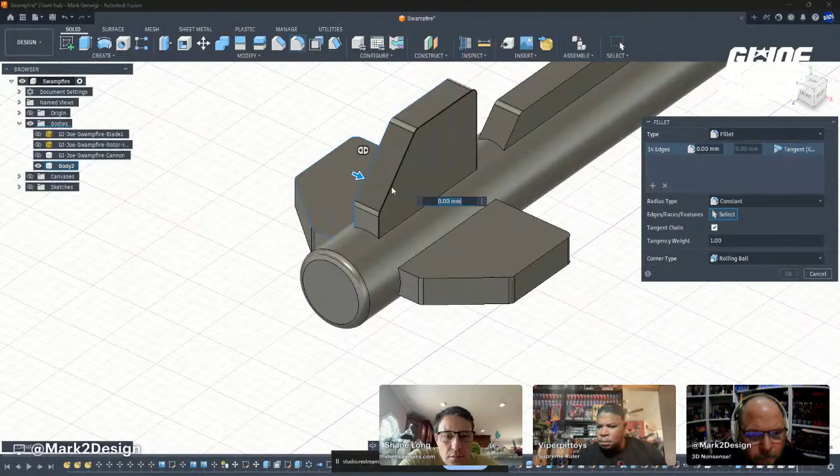I bounce back and forth. See, that's on that edge, it's too much, so I'll go to 0.2. I bounce back and forth between production design and 3D printing, and I do this on all of it, but printing demands a bit of a heavier hand. Like in there, I'll do

0.1. So that reverse fillet was 0.4, you said? Talking about in here? That one. I made it smaller, I went back to 0.1 for that. Oh okay, gotcha, because it still kind of needs to be fairly sharp inside there.

Here, I'll go up to 0.4, and then on the edges I'll probably do 0.1 or 0.2. Yeah, 0.2 looks good.

And then I think Goose asked a question. He says, so as you select an element of the build, will you be able to individually select the details, or do you have to adjust it all as a whole? I mean, everything's kind of individual, you should be able to do everything individual.

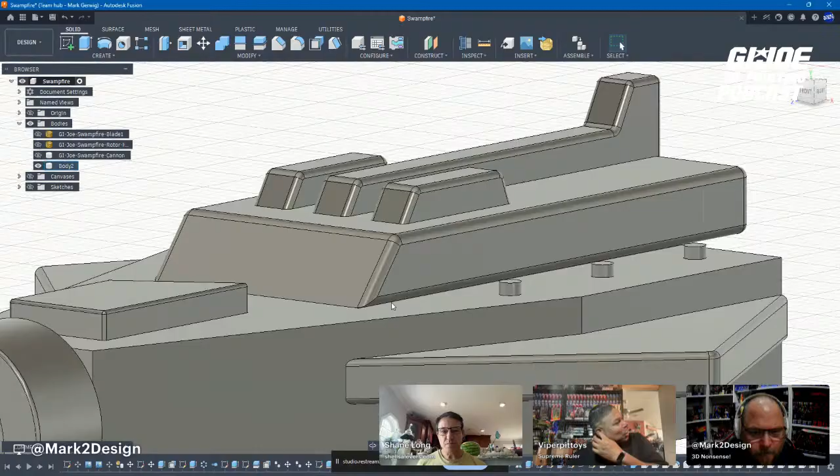So what's the highest end thing you're looking for? Well, you're talking actual production stuff, not the pre-production samples. Yeah, right, production stuff. Mostly I'm trying to get or finish up all the convention sets. Oh shit, okay, those are thousands, right? Yeah. Like what is it, the Doomsday in the Marshes or whatever. Yep, I don't even like that, but that's pretty close, just the way you said it is pretty close to what they sound like. I'm trying to finish up Tanks for the Memories, I got a couple, I got like one or two guys I need to get.

There's another one called- hey, real quick, I'm sorry. So when I did that big rounding, it rounded this in, which it was not supposed to do. I was going to ask if you meant to do that. Yeah, I did not. So I'm going to the timeline. Fortunately there's not a lot here yet, so the timeline's going to let me do that. But see how I very deliberately made sure these met, so that I would avoid doing what I did.

So I'm going to get rid of this other stuff. Well, not those yet, but the original gun file that Shane provided, I want to remove that, just so it's one less thing.

In theory this should go this way, right? Yeah, right to there. Okay good. So for some reason, on this specific point, Fusion decided to run this tangent chain all the way down here, which is not what I want. So I'm going to do this edge first, and then I should be able to do that separate. There we go. Little weird looking, but no one's going to care.

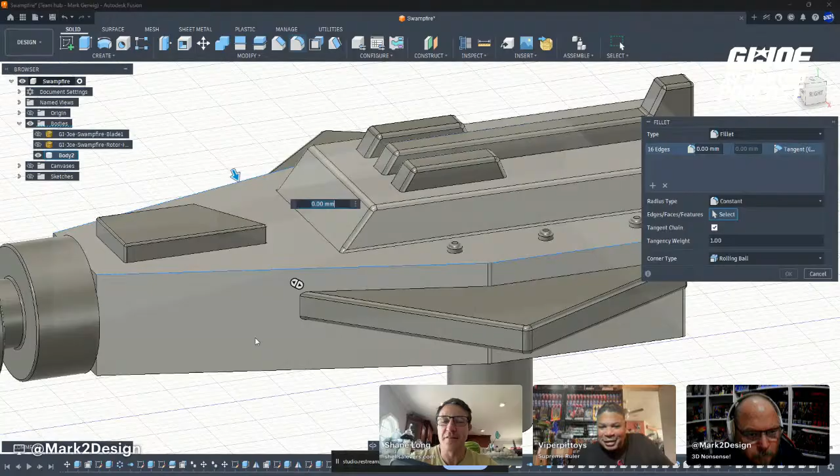This is a live update from the kids just walking outside. My wife just sent this video of this huge snake crossing the path here. So this is what we get. I'm broadcasting from the country today, and there's a snake right there. They just walked out the door, man.

They need to make sure they understand what type of snake it is.

Anyway, I was looking up all the convention things. I started collecting Joes after the official conventions were over, so I never had a stab at getting one of these. Now that we're at Joe Fest, Hasbro doesn't do conventions specials anymore that interest me. There's classified stuff and people who make things, but it's not like Tanks for the Memories. These used to come in cases, like nine figures, with a storyline behind it, and if you go way back they had Moray in blue and different colors, but using the original molds where they could find them.

I heard a story about them trying to redo the Mauler in a different color, and they lost some of the molds, so they just never did it. They did some of the pieces though, and some of those pieces are out there.

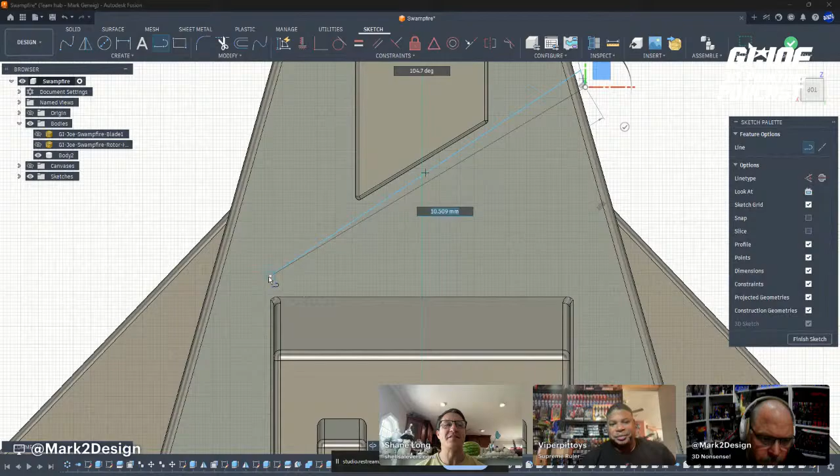All right, what are you doing now, Mark? There's a feature on here I hadn't done for some reason - oh yeah, it's that fan thing right there. There's three of them, right? That looks like a good way to describe it.

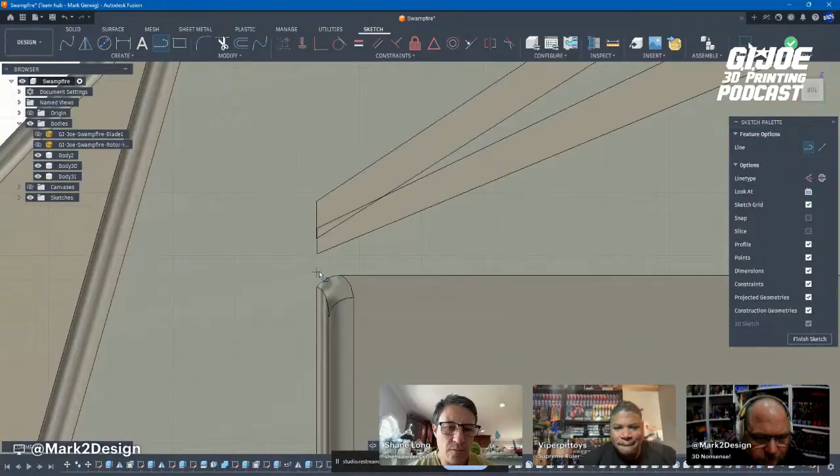I'm just going to use the first one to help shape the second one. So I'll do a split body, and use the top of the first one to make a cut, so they'll be exactly where they're supposed to be, and I can alter things. Sketches are a pain in the ass to manipulate. The software is meant for shapes, and so it's good at doing that.

So when I was originally doing this, I thought this kind of detail on the cannon, this fan detail, was weird, right? But now that I think about it, looking at it, it's very Dreadnok-y. I could see this harkening back to something on Zarana, her shoulder plate thing - like a pauldron, something on Zartan - so it's very Dreadnok-y in my brain.

Kind of asymmetric, and what's the word I'm looking for? They always kind of give me that Mad Max vibe. Yeah, right.

So I know in the cartoons everything was meant to be a laser because they couldn't have guns. But is this a gun or is it a laser? It could be a damn water cannon, like they have water cannons on the front of the swamp skier. In the cartoon, there's an episode where I don't remember if Zartan was there or if it's just a Dreadnok, but they had 3 or 4 swamp skiers, and there's a general, I forget, like Sparks or somebody, in like a fan boat, and they knocked it over with squirt guns from the front of the swamp skier.

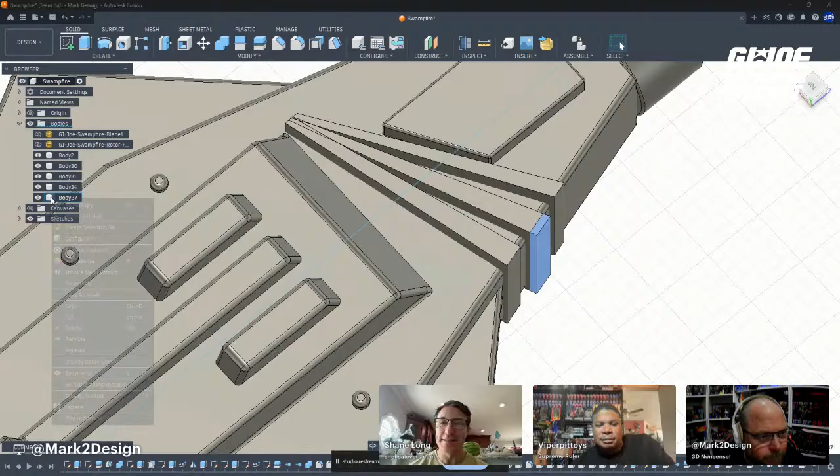It is called a Sinker 25 millimeter auto load repeating cannon. So 25 millimeter is a shell and not a laser. So that's a big damn gun. Yep, that's a really big gun. In the military, we have a 25 millimeter cannon on top of the Bradley fighting vehicle. Oh okay, there you go, it's a big honking thing.

And the pontoons are called aluminum super sealed gas filled pontoons, and the gas filled is of course vanilla scented gas. And so on the Swampfire, there's fire coming out of that cannon, basically. Oh yeah, there is. And on the title screen image that Mark created, there's fire coming out the back of the Swampfire, but that's okay, there are too many cool details in that I loved. I could overlook the one or two that AI got wrong.

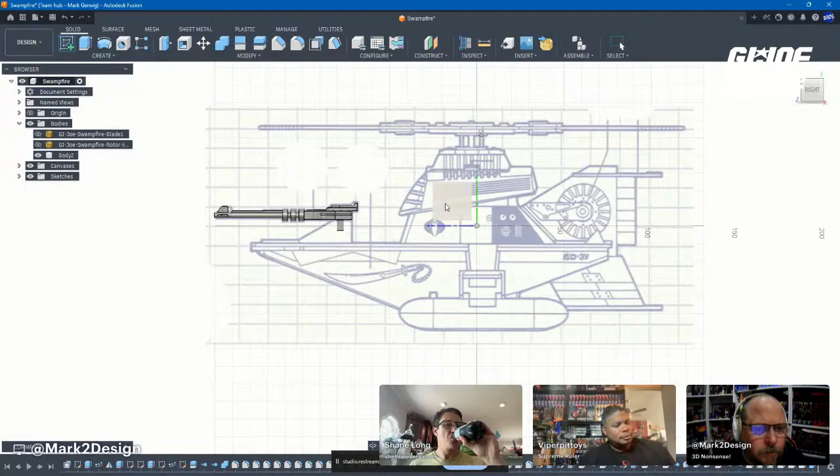You're such a big man for that. Yeah, no, it's brutal. Every time I do one of those thumbnails, it's not like it just poops out a perfect image ever, you always got to go back and fix it. Well, if it were easy, everybody would do it, right? Well, they're trying. I got called lazy from someone because I did an AI thing for something, because I didn't draw the thumbnail image myself. So this was something else I was doing for someone, and it was just supposed to be a fun thing to do, and I'm not so good at Photoshop that I in a million years could do what they wanted. So I did it partially in Photoshop and partially with an AI tool. And it was like, man, that pissed me the fuck off, dude.

All right, let's see, in the chat: I do want some Ninja Force and Cotton Candy Vipers. All right, yeah, an O-ring Ninja Force. I love the pastel colors and wild neon colorways, like an ice cream soldier. What's a Cotton Candy Viper? You talking about the mail away? Yeah, that's the only one I could think of that's kind of cotton candy. The one Chris did is Dread Troopers based on that color. Yeah.

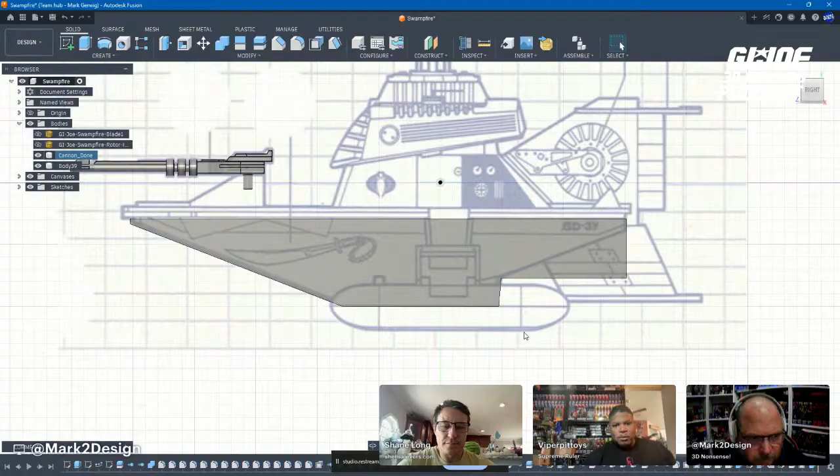And now you've moved on to the bottom portion of the Swampfire. Yep, I just started with a box and I'll just kind of bend it into shape. That's the beauty of these blueprints, they really let you take some shortcuts, I guess.

Yeah, these blueprints are a bit off. I don't know if it's because I put them down wrong or because they're not actually accurate. I don't know, no one ever will. But I'm sitting here with my calipers, I took a measurement, and so that's what I'll use. That's what I'll go with, my legit measurement.

I'm not sure I'm doing this right. So looking at it from this direction, this isn't wrong, but it's not giving you the full story. Just forward here, about right here, the front end kind of starts to point in towards the middle. This comes down and is rounded, and then this bit down here in the corner merges separately. So we've got a slightly more complex shape than the blueprints would lead you to believe, but none of it's going to be as bad as the body of the Fang 2 that we dealt with.

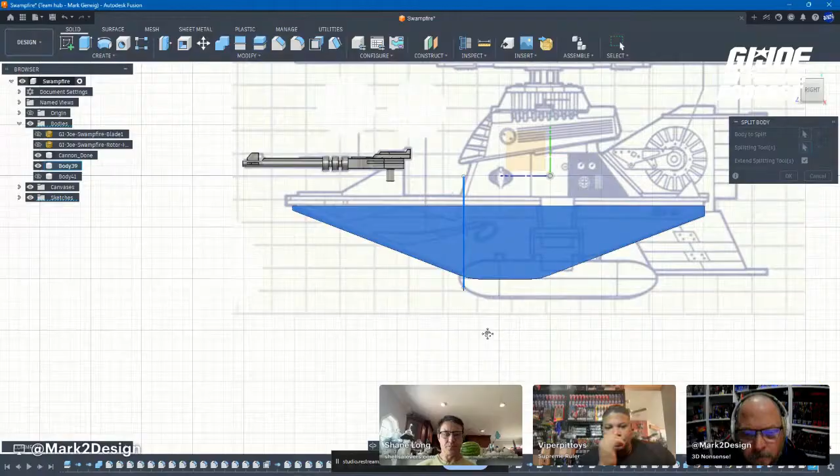So since we're on this, I wasn't going to do this yet, but we'll do it now. I'm going to cut this. I just put down a line, and I'm going to split the body there, and then I've got to make this go away so I can grab my draft tool. And that's your 9 degree, and it should be 9 degrees. What I can do is measure the front.

And that's 28 point something, closer to 29. So half of that's going to be 14.5-ish. And so we're a millimeter off, which could just be because we're a bit long. But a millimeter isn't killing anyone. That's kind of just fine.

Yeah, this is a pretty subtle curve.

You know what, let's go to the top and see what the top looks like. It'll be the deck, which has got more of a sharp angle. Yeah, the deck piece from the top is different. But it's okay, I'm in the ballpark. I'm not making reproduction parts. We're making a solid thing that's going to be produced differently, so we really just need to be pretty close.

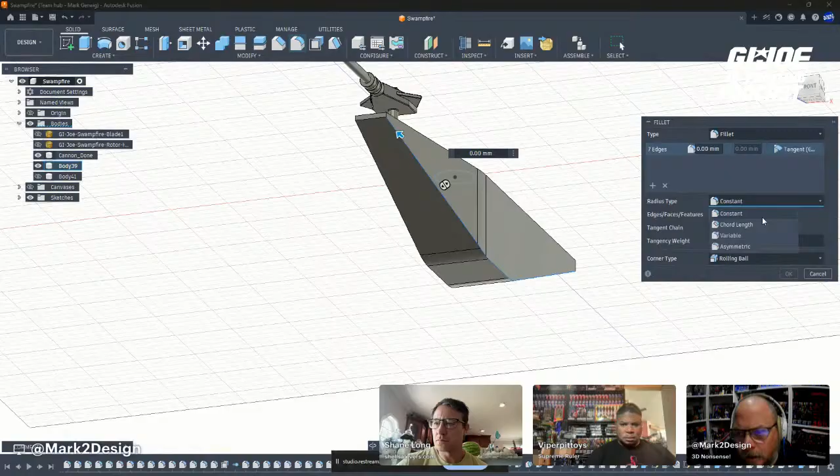So what I'm trying to decide as I'm looking at this is whether the curve that runs along here is a constant or if it's going to need to be, what do we call it, variable. I think it's going to be variable. But on the back, it might not be. So I think what we're going to do is a couple of cuts.

So I'm splitting this body with this box I made. I'm going to do a simple curve in the middle part.

I'm gonna go 6.5 just so I have a nice even number. Everybody remember 6.5, you got it. And then we'll do 8.3. That's not funny, man. 6.5 back here, and then less than that up here. Ooh, cool. And then we'll do the same thing back here.

6.5. Oh, that's supposed to be variable. I love that, that's just awesome. All right, and now we're going to add this piece back in. To me, that's a new trick. I don't design vehicles enough to know that existed. The variable, yeah, yeah. Interesting.

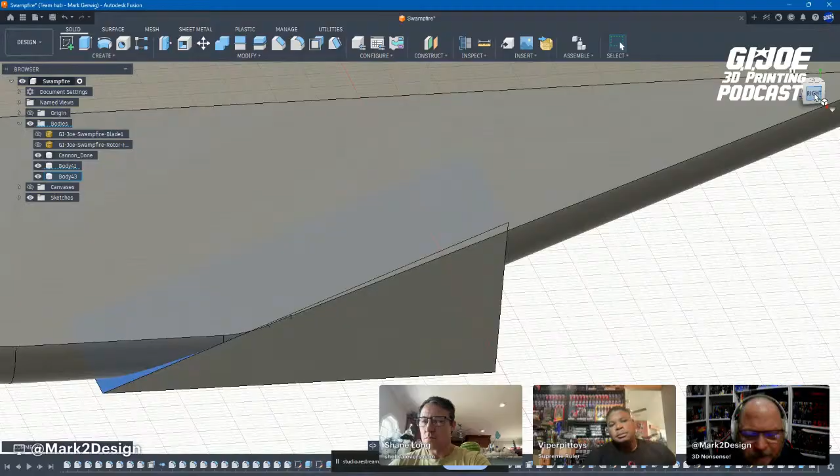So I've stretched this up a little further than it really needs to be. I'm just going to take it up a little higher. Yeah, that makes sense. So I've got this up here. I could do a line, but I'm doing a box because it guarantees that I'm going to have a 90-degree, squared off with the world, line. And I'll get rid of this little chunk here.

But now I've got a nice angle I can use to do my draft. And I don't know, how easy is this to pull apart, Shane? Take off, slide the tail off, and then it just opens up. Okay, cool, thank you.

So I did that so that I can now measure the angle of this draft. I'm going to call that 29. Okay, so that was kind of my concern. That's correct. But no, I have to kind of move it back out. It's a bit of guesswork.

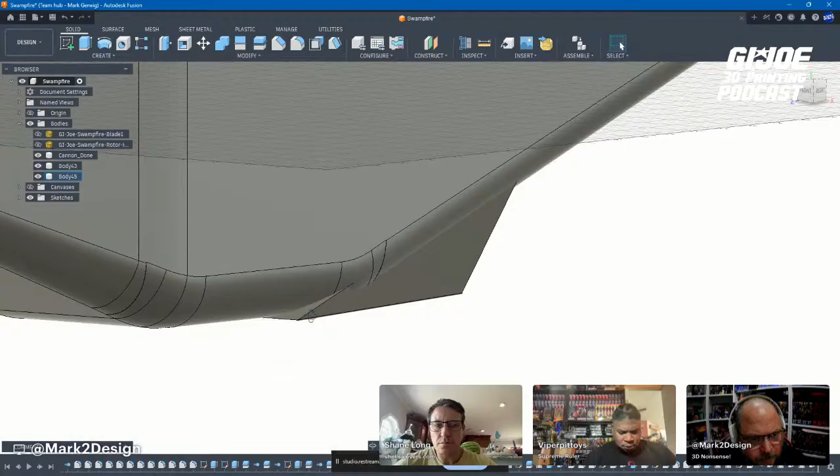Just trying to think about how to, obviously this needs to go away, right? It's also got to kind of line up.

Do you round that off as well, or with putting like a giant fillet on it, or a variable fillet? I'm working it out as we speak. I know I don't need this point. This point up here isn't going to do anything for me. I'm going to try, I think, to do a chamfer. I just need it to kind of go away, you know.

And then I can round that. Oh, okay, now you round that off, and it kind of blends it in, I bet. Eyeball it in the middle. Yeah.

But like this whole, once I merge it, this whole edge here will get a fillet. Yeah, I like that. So let's see. And I need constant now. So okay.

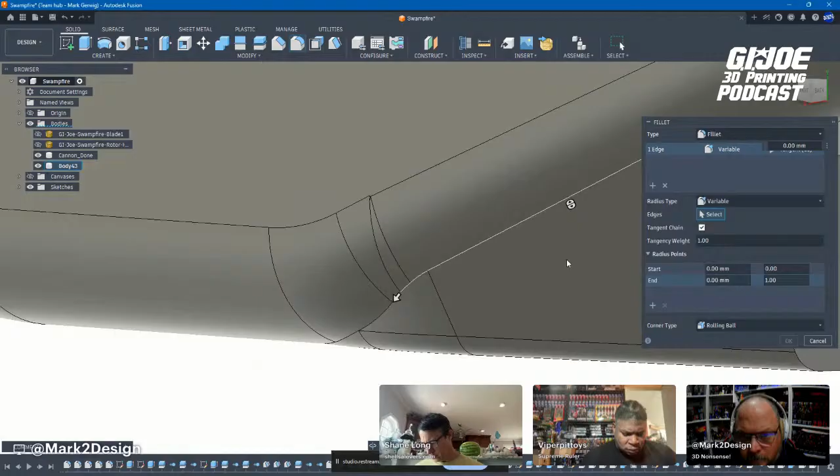But yeah, I think that works. So describe what you did as the fix for that. What the fuck did I do, man? I don't know, I don't know. I was just playing around.

So when you're doing these fillets, I think they require the software to do a lot of math. And the more times you cross a face where you've got these lines, it compounds the math. That's a face, that's a face, that's a face. The more of these you cross, the more complicated it gets. And when you get down to points especially, it's too much. So what I did was break up the faces in such a way as to enable the software to function and do the math without a hiccup.

So which break did you put in that allowed it to work? If you select a line, you just select the line. If you're doing a chamfer or a fillet that can function along a tangent chain, see how it's got tangent chain checked? It should grab all of it, this whole line, no questions asked. But I see that it didn't. It got to here and it stopped. So that means something about this line is a problem.

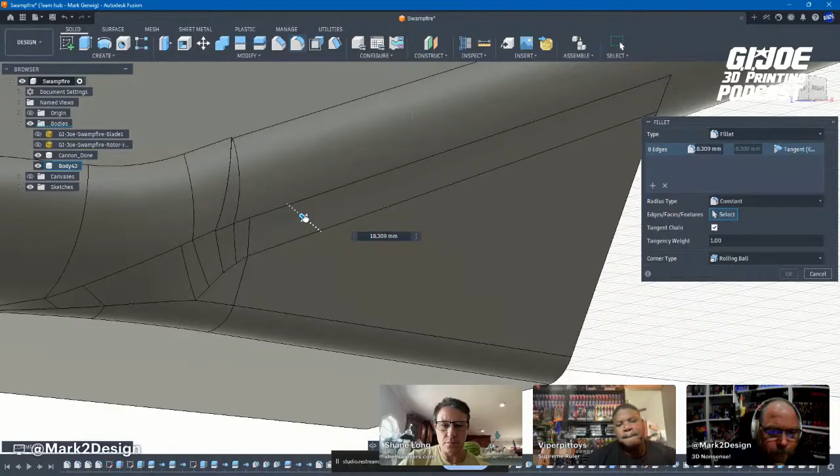Yeah, so that's kind of the fix I've learned. If I go to grab a line and it should be a tangent chain and it gets to a point and stops, if you look where it stops, there's something going on. Sometimes it'll be red. I bet if I pull this enough, something will turn red. Yeah, so something somewhere it's not doing it for us. See how that's turning red right there?

That's the point where it's an issue. Now, I don't want it curved this much anyway, so it doesn't really matter to me, I want it about there. But that's just kind of how you identify problems. And then my first go-to solution when I run into a problem along a tangent chain is to grab the point where it's a problem and give it a little bit of a fillet, and sometimes that fixes it. Not always. Sometimes.

And then I've made a bit of a mistake that I'm going to need to back all of that up to fix, which I'm not excited about. What happened? Well, what's your mistake? On the bottom there's these ridges, you can see them here, those are the flat parts. So rather than back up any further than where I'm at right now, I'm going to do a chamfer from this edge.

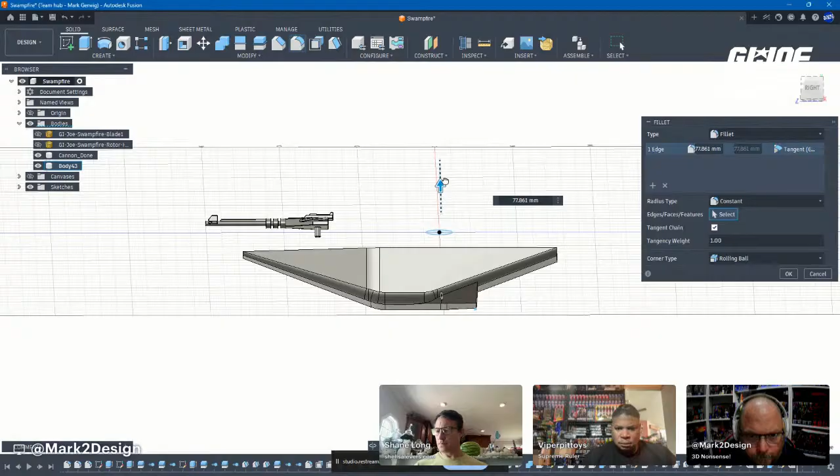And that's real subtle, I feel like that millimeter is almost too much. I'm just trying to make that as nice and subtle a curve as I can. So we'll come back here in a minute and add those ridge lines, but I need to come up here and redo all that nonsense I did before. Oh yeah, you can see that a lot better from that angle. You saw that, right? That ugliness. Yep. Maybe I might be able to curve this even back a little.

Oh, see, and now it doesn't like it. Womp. Yeah, right? Oh. Come on, man. Don't do me like this. Right? Oh, what a douche canoe.

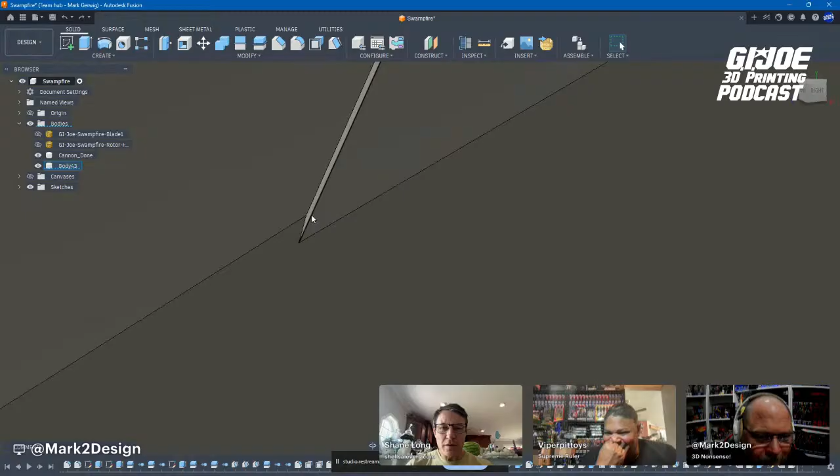Now you can grab the whole line, but nothing still. Nope. What I did down here should not be affecting up there. So what changed? This is stressing me out. Yeah. Oh, look at that. What, the little point? No, I mean this is the same thing I've been struggling with for the last minute or so, just trying in different ways.

Yeah, that's... I can't even grab any of that shit. How did I fix it the first time? This is ridiculous. And that kind of works. So, I don't love that, but I'm tired of dealing with it. Let's see.

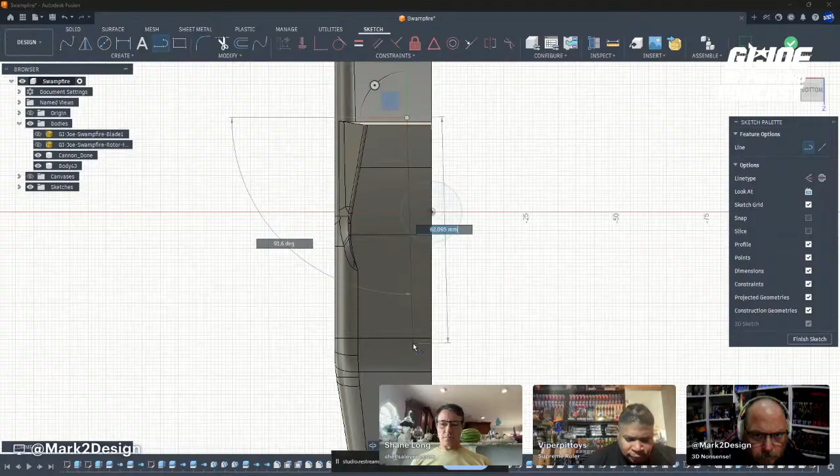It's actually kind of big. I don't even have a great place to kind of draw this from, so I'm straight eyeballing that part. So we're gonna do a split body, and then that part I just cut off, we're gonna split that using this.

And that's got to turn. Yeah. Interesting. So we're going to do another split. We're going to split this guy using that. Make this go away. And draft.

So for those of you following along at home, if you want to look at your Swampfires and tell me if that looks right to you. So when do I do that now? This is a bit of a weird one because I think I need to merge the other half to do this curve justice in here, because that's a curve, this is a curve, and when you do both of them, it ends up kind of curving the front. So I think I'm not going to mess with that for now.

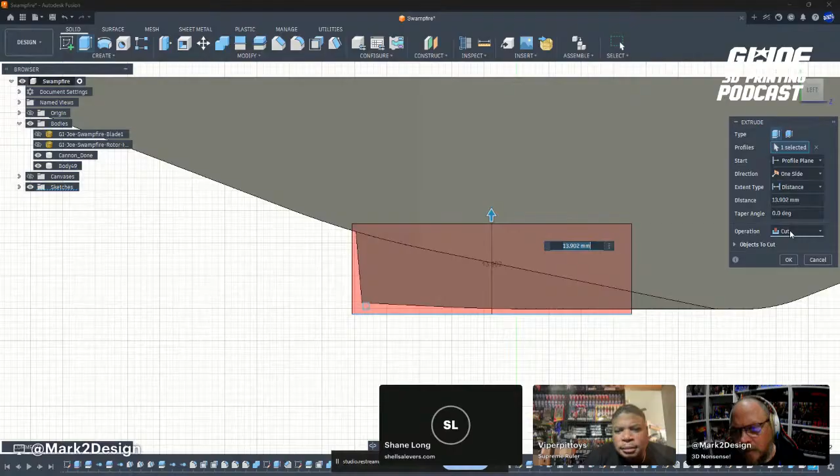So again, we're going to just do some body splitting. Okay. So that brings us back to nice and flat at the bottom, but this has to angle up along with this. So, just as kind of a shortcut, rather than trying to take any kind of measurements, I'm gonna split body with that. So that's gonna put that face at the same angle. And I think that's the key, that you angled it. Okay.

Pull this out, 1 mil. I think I can get away with rounding some of this stuff now. So, all right, so right there we've got a spot where I can really... Oh, that's interesting.

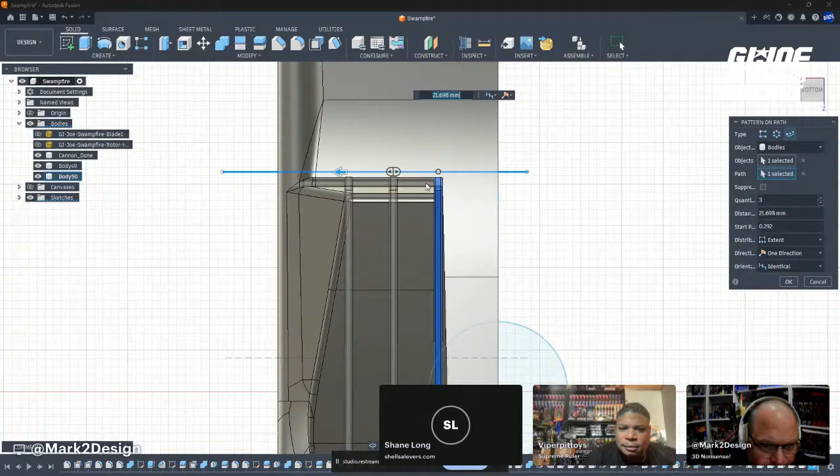Easy peasy, I like it. Yeah, that wasn't too bad.

I'm still going to need to round that nonsense. I'm going to undo all of that and move this guy over a little - not a lot, just a sliver - and then repeat what I just did. The reason I didn't try to move just one is I've got a nice symmetric spacing between each of them, so if I move one, I have to adjust all of them, and then I'm guessing what should be where. It's easier to just redo it, and now everything's nice and symmetric.

Jesus, come on, all right. That looks great though, there you go.

And then once I merged left and right, there's more ridges like that on the front, and there's a couple of panel line things on the back, but they are not symmetrical, so I'm not doing those now. I think I'm just about to the point where we'll do the merge. There's, down from the top, that's like an angle.

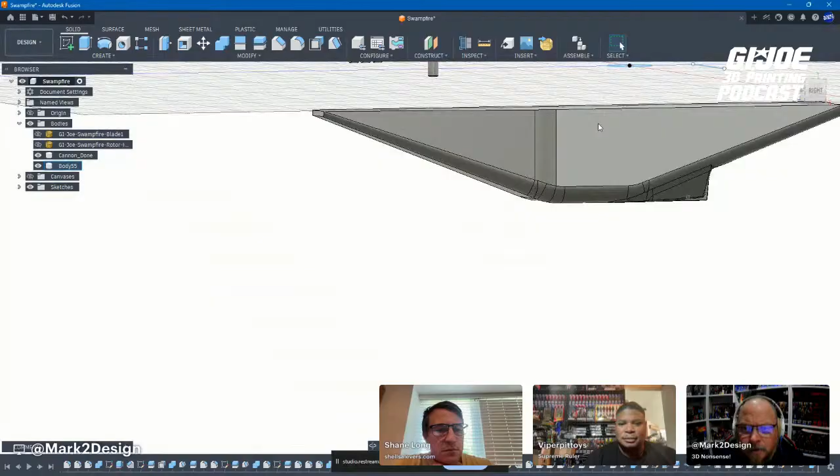So this shouldn't be perfectly up and down like this - it's probably like a 1 degree angle out as part of the mold release design. I'm going to leave it like this, it's not bothering me, but I'm now noticing it because at the very top up here, there's about a 2 millimeter thing where it angles very subtly to bring it back up to straight up and down, and below that there's like a ridge line that we're going to add now.

Is it bringing back some Fang 2 PTSD or something? Not quite yet - I was getting a little frustrated there, but I'm okay now.

Speaking about the Fang 2, as you're doing that Mark, have you seen - I know people are printing that, as I mentioned earlier - have you seen any really, really cool adaptations of that yet? I haven't. I had a lot of people ask me exactly the purple I used because it's perfect, and it really is - it's really an attractive piece when it's done in the right colors. I've seen a handful of those. A couple folks have told me they did it like an Arctic version or a desert version, but I haven't seen pictures of them.

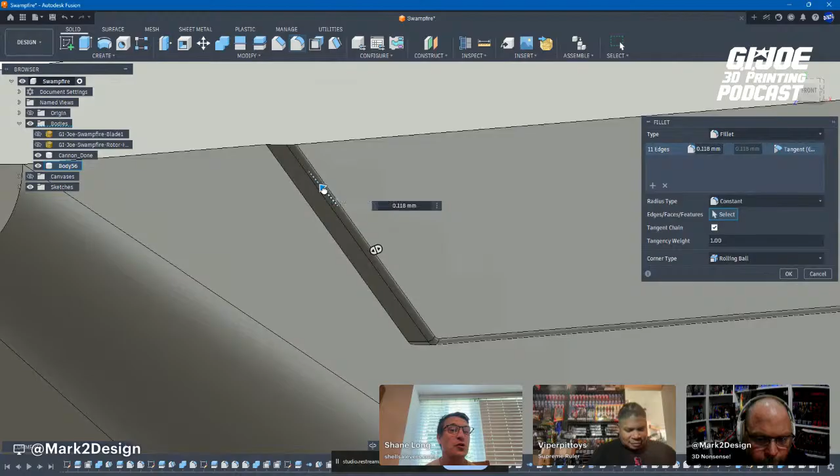Mark, I'm not gonna lie, there are sometimes that I take the podcast and go back and try to replicate some things that you've been doing just to teach myself a little more about Fusion, and I think that's one of the things I'm going to do. I don't know how you just did that, but I'm going to go back and try to replicate how you pulled this piece out, how you separated it out. But that's okay, you don't have to explain it now - I'll go back and watch it again. Well, I mean it's pretty quick and easy.

I drew a line, then did split body - split that body with the line that I built, and then selected it. You could do a press-pull, but I did offset face because that's my preference. That's the quick button up there, offset face, and then grab all of it - grab all the faces. That's kind of the trick, you verify that you've got all the faces, and then you offset them all at once. So if I grab one face, sometimes it'll tangent chain along and pull everything out, and sometimes it won't - it'll just pull the one face and you end up with a distortion you weren't trying to have.

And then I just did that little bit of a fillet on the edges there. So I think at this point we're gonna do a mirror, and then on this one, usually I don't let it join. If I've got a bunch of pieces in the mix, I just don't want to take the chance. They kind of fixed the software from when I started doing this. If you did join, it joined anything it was touching. So I got in the habit of never doing that, and now it's muscle memory, and I don't screw with it. I would rather just have it two separate bodies and then manually control what gets joined myself.

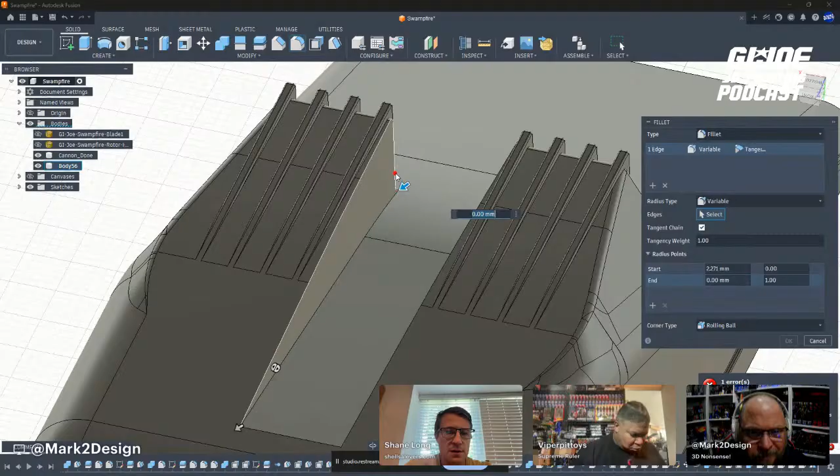Yeah. So this is happening because I merged these ridges to this piece. Is that the right size gap in between there? It's hard to say because there's a bunch of... I think I'm a little wide. Yeah. Oh, you mean with the whole thing? Yeah, the whole hull is a little wide.

Yeah, you know what? Let's go back and we're gonna fix some stuff. You're making a 2-seater Swampfire? No, it's not that wide, baby.

Wow, did we really go that far that fast? Yeah, I mean, where are we at? There we go, just 1 hour. I just mean from when I merged the two halves. Oh, okay. But yeah, I mean, you've only been designing for like maybe 55 minutes.

Okay. So here's where I messed up, and we're gonna undo that as well. This should be beveled like that, and I'm not gonna be able to get in there and take a measurement, but there's definitely a bevel in there. That's gonna make us a little thinner.

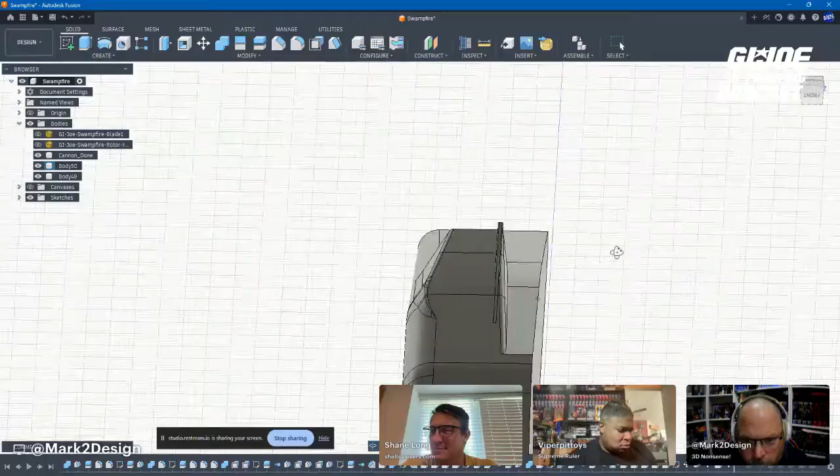And I wanted to do all these curves after I did the merge, but it's going to be a hassle. Excuse me. So I can do this now. And then I might do that middle part after, I don't know. Okay. See how that made us a bit thinner? I just have to redo some of that work I've already done.

So we'll do our pattern on a path. Okay, and what I'll do is mirror everything and join that stuff after. What I am going to do, I'm going to redo this detail up here first.

So yeah, and splitting the body. And since we're doing this, I'm going to grab just one face and pull it out and see how it did this. Now, sometimes you want an effect like that, but we don't want that right now.

So I'll undo and then offset face, and I grab all the faces. And I'm just going to 5. And that's the 0.5 mil again, right? Yep. Now, because it comes, like if you remember what I measured, it was like 0.503. It was a little different because it wrapped around that curve.

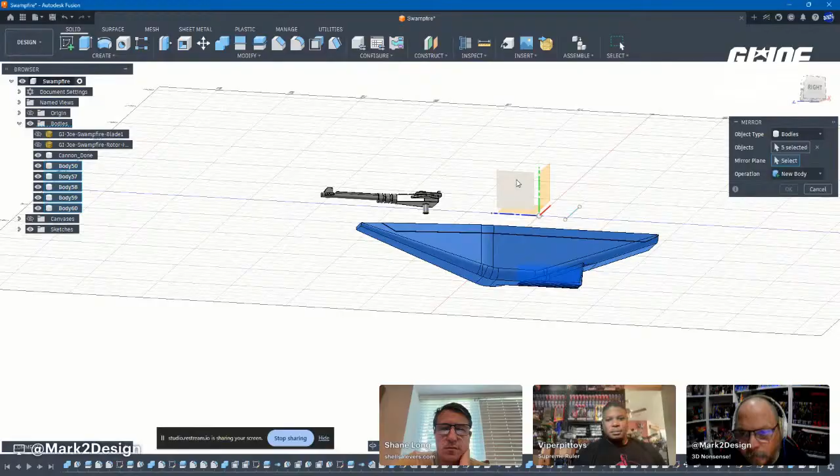For poops and giggles, I'm going to let it join. Cool. So, yeah, back in the day, like a year and a half, 2 years ago, if I had done that, all these pieces would have merged automatically, which I wouldn't want. So let's see what this does.

All right, still not exactly what I want. Damn it, yeah. Oh no, not bad. It's not bad. What don't you like about it? The top part, the front part? I think this needs to be angled in more.

Which I can't do because of this curve. But I don't know if it's worth going in the timeline and getting rid of that curve so that I can. No, I'm not, we're good. No one's looking underneath this thing. Yeah, I need to calm down a little bit.

Too much. I think that is going to handle the waves perfectly. Nope, not that, not that. Yeah, that's not what I want. So,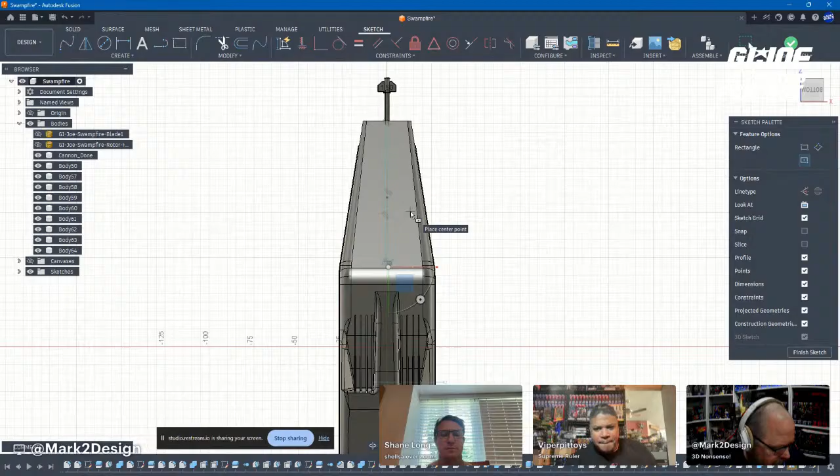So what more are we doing with the hull part, for this bottom? There's 3 kind of ridges along the front, and then there's some panel lines on the 2 back halves of that. We'll do the split for the tail, and then we'll do the panel lines, and it's got to have some cuts where the pontoons can fold down.

So I'm trying to wiggle this sketch up a little bit. There we go. So there's 3 of these. The middle one's a little shorter because there's also like a little cut that I still kind of do.

Oh, that was rude. Did you see that? I went to move just this top part of the sketch, and because I was freehanding it, it drifted left off center, which I don't want.

Let's see, we're gonna split body. I also could have sketched this on that plane. Either way is fine, it doesn't matter.

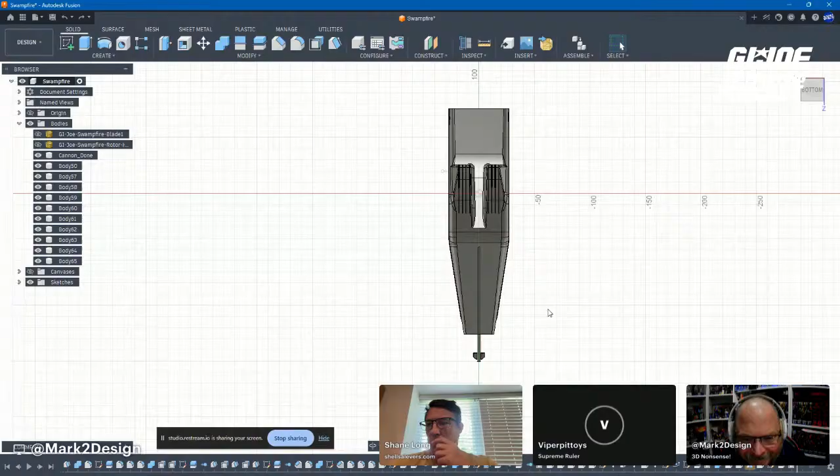Pattern on path: this object, that path, and then I'm just going to do symmetric. So these actually, I kind of hosed that up. I'm gonna back that up a bunch, because they kind of follow down through the curve to where it gets flat, which is there.

So we'll do this again. Split body, this guy, it's fine. And so this is perfect. This is exactly a situation where I'm going to grab just that face, and it didn't do it. I thought it was going to pull out and leave this flat. Oh well. What were you hoping that would happen?

I was hoping that this actually, yeah, I bet I can do this. Hold on, I have faith. I mean, I wouldn't go crazy. So I'm hoping if I cross that line, that'll be the thing that does it for us. So, split body.

So I'm grabbing just that face. There we go. Oh, that's cool, that's what I wanted to happen. Exactly that, because that's what I needed to do.

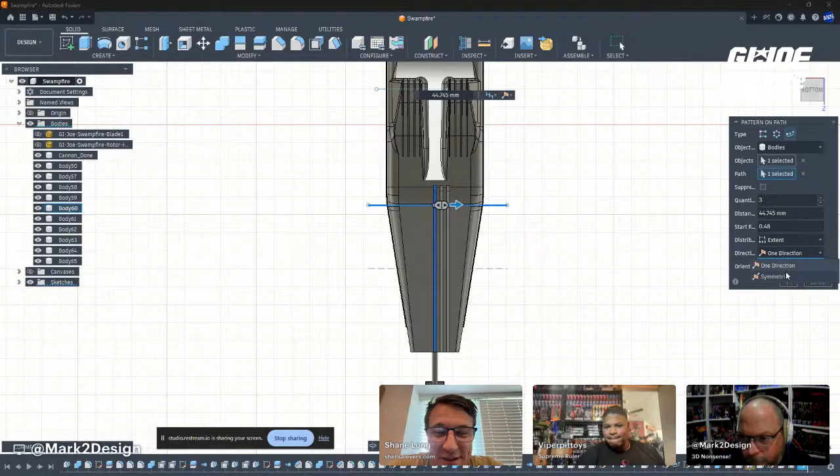So I'll make this line for the... I will tell you, for the millionth time, there's chatter in the chat about making this motorized, which goes along with the beginning of our conversation about how many He-Man vehicles had batteries in them. I'm all about making more batteries in toys. There's so much out there now too, so many little electronic kits if you go on Amazon, there's so much you can do for not a lot.

So this, I think I've shown this before, this goofball - this is the Sonic Fighters Falcon, my custom. This was the custom I did for the classes coming up. Oh wait, I'm trying to make you big screen here, hold on.

Oh, the button disappeared. Nice, there you go, there you go. Can you hear it? Yeah. What is this again? Sonic Fighter, based on the Sonic Fighters Falcon.

Oh nice, so wait, so you made that? Yeah. What electronics kit did you put in there? It's a couple - one to make the blinking LEDs, and another one with a speaker and a couple little chips, so you can plug a USB into it and load MP3s onto it. Oh okay, so it's two different kits that I wired together. My dad figured all that out for me and told me how to do it.

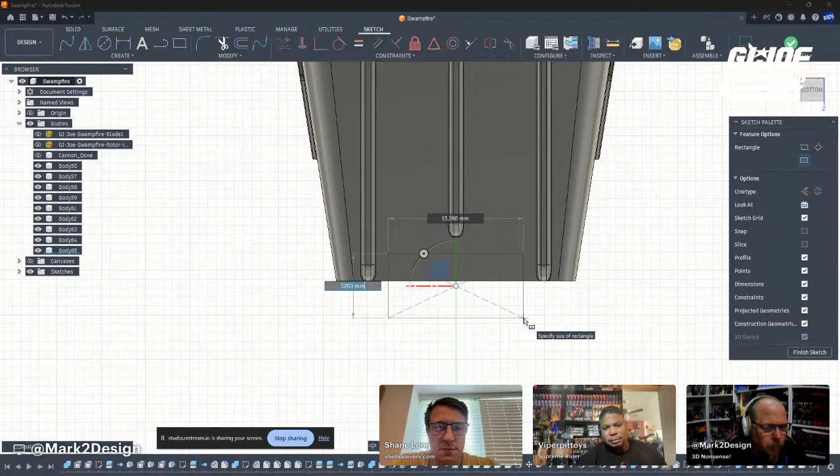I'm not too concerned about this. I don't plan on this being what really holds this thing together. This isn't parts out of a 2-part injection mold, right? It's not going to be hollow like this - well, it probably won't be hollow like this, it'll probably be filled. That's a lot of wasted filament and space, and therefore weight. So we'll probably do something to hollow it out to a degree, but it isn't going to be just walls like this.

Yeah, so this is what I'm doing. You know, one of my biggest difficulties with watching you build - oh go ahead.

Uh-oh, did he disappear? Yeah, he's back. You know what I hate about you, Mark? No, I was gonna say one of the biggest difficulties about watching you do this is I'll put it in full screen so I can really see the details. And when I'm in full screen, I'll want to see something you're doing again, and I will literally grab it and start acting like it's Fusion and try to move the model. And I'm like, oh, I'm watching Mark do this, it's not - I've done this like 3 times now. I keep thinking it's Fusion, I go grab it and try to twist it around. It's messing with my brain.

Yeah, that would suck. Sorry, I didn't mean to interrupt you and cut out. No, it was the way you started to say something and cut out. Yeah, you know what my biggest critique about you is, Mark? Where'd it go? What is it? And on that cliffhanger, tune in next time where we find out why Mark's an ass. Nah, no shit, that's not such a mystery. Yeah, my wife's been telling me for years.

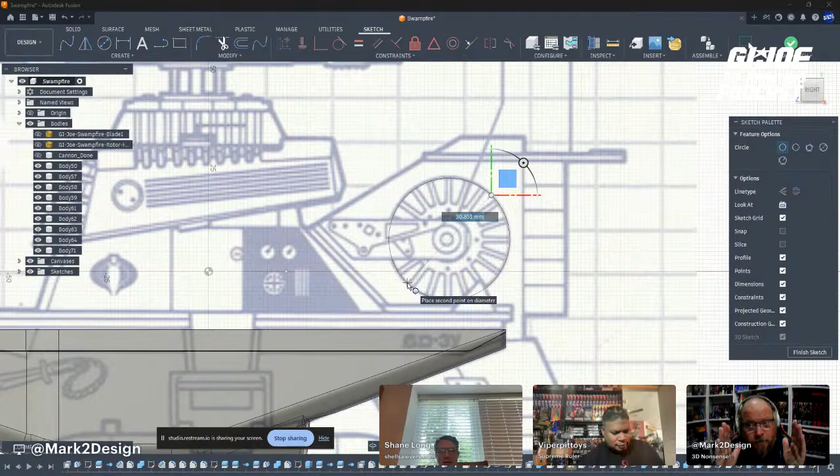Sorry, well here's what I'm going to do. I'm grabbing a circle tool. And see how that's a circle? Yeah, if this was pinched, if it was squat, if the image was squished, this wouldn't be a circle. It wouldn't be a circle. Yeah, right, yeah.

Maybe so, it's just perception. It's the blueprint not being perfectly accurate - it's definitely not correct to the toy, especially the pontoons. Holy shit. So we'll do some tweaking and make some adjustments and get it closer to true. But yeah.

So I did - I can do this, man. We'll see what we're looking at. From the top of the back of this to there is 65 mil. So I'm going to do this in a weird kind of way. From here, there should be 65. Wrong one - right there, so that's not bad, that's pretty close. And from the top to there, it's about 20.

Figure 6-pack just said that being able to print this in the Brazilian Python Patrol colors with maroon, yellow, and black. Maroon, yes, see that is the one that's on my list. Having that Swampfire, but it's a very expensive toy as well because I guess it's Australia or whatever.

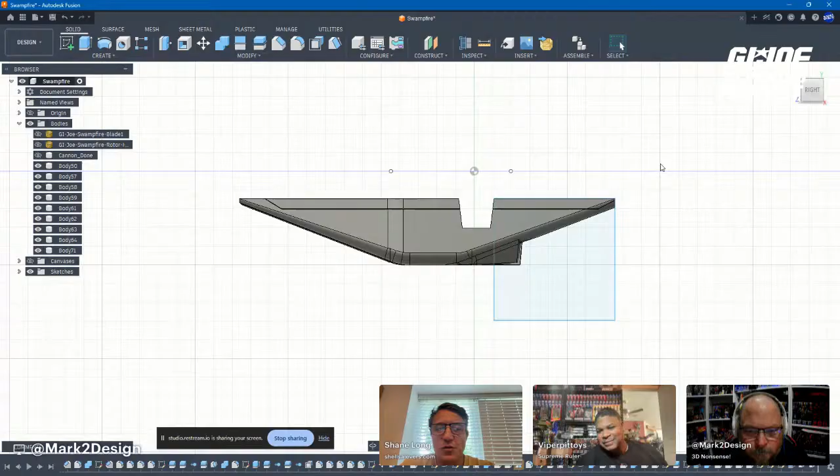Artwann, if you could pull it up, I can share. Okay, let's see, I can put a link to where I found it. I'll give you a link.

Like if it's just like a slightly bluer green and that's the only difference? No, it is amazing in every way.

There we go. And Artwann, the reason why you're not actually showing the real one is because it's behind protective glass in your vault. No, it's actually in my cases over here. I have to have a key to open it up, and a password, and I gotta grab the key. And he has to do that. I can't tell if he's kidding. Laser, no, I'm serious, do the laser thing too. He has to turn off all the lasers. I am dead serious, I have all my cases to the right of me, they all have a key that you have to open up the glass.

All right, so found another gut-wrenching mistake.

Did you share that, Artwann? I think so, yeah, okay. I'm trying to find where you shared that at. Oh okay, I'm going to stop sharing, I need to see this thing. Okay, there it is, there we go.

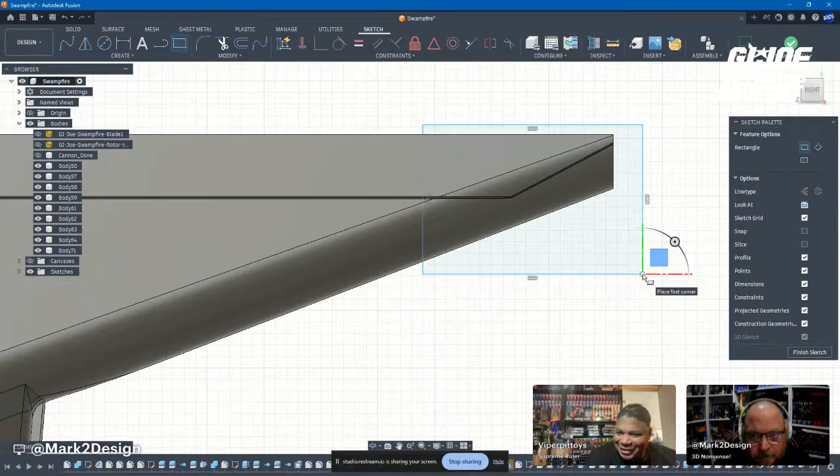See if it allows me to go back and try to bevel in and kind of hide it. Like the correct way to do it is to go back to before we split it, or before I mirrored it, before I did this curve right here, before I put this in. And I'm not doing that. That's just too much. I'm not doing it.

So what should happen is when I do offset face, it'll pull out. This should just pull out, and it's already failing. Not doing it. So, it's not doing it because of all these fucking curves. Yeah, it's not even trying. That sucks.

So let's see if we can simplify it for a little bit. I'm going to do a split body on both sides, just to get rid of those edge pieces. And then go back, grab face. Let's see if it pulls. This should work. It's not doing it. That's really kind of weird, actually, that it's not. That should be working.

Is it because you know what it is? This chamfer or this fillet back here is variable, right? And that's what's screwing it up.

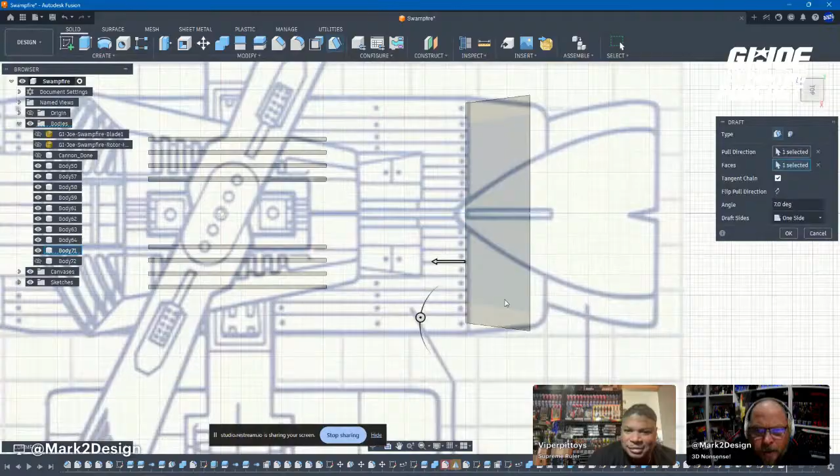So the question is, can I do this? Can you? Yep. Now it's going to create an extra bit of curve on the bottom that I don't want. Right there, right here. But you know what? I don't care.

Now, just for poops and giggles, we'll play with it a little, just to see if we can trick it. So I'm gonna... ooh, you know what would be hot if this worked? Sometimes this works. I don't expect it to. No, that would have been really cool.

Yeah, see, for me it's the on-the-spot problem solving. This is why I don't like people watching me design, because I made a mistake and now I'm struggling to fix it. I would have thrown the laptop at this point. It's infuriating. There's so many details, so many things that can go wrong. Why did that work? That should have worked. Literally worked on the other side a second ago.

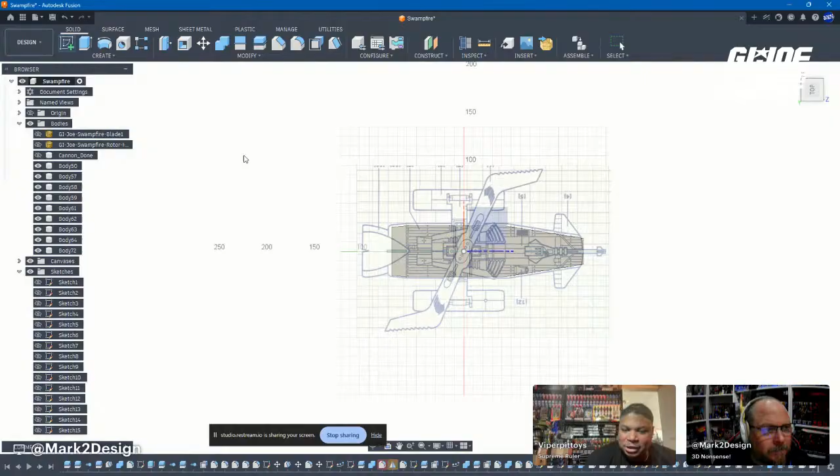And I'll have to sit there and try to design on the fly, and I'm just sweating. Trying to look cool, but I am sweating. I mean, the problem solving, fixing it part, is the most important part for me.

Get the crap out of here. Because you're always going to end up designing yourself into a corner somewhere, somehow, especially when you're creating something based on something else where you're trying to match things. If I was creating this just out of my head from scratch, I wouldn't have had to go back, it would just be what it was. So reproducing an existing something is harder than making something new.

Oh wow, I'm getting bombed here. Ha! I fixed it. Oh man, Artwann, I can't believe that fucking worked. It worked.

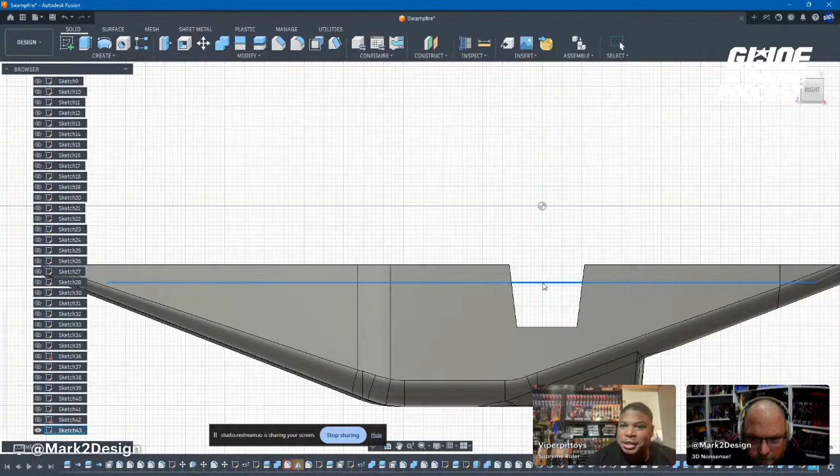I am trying to make an executive decision on whether or not I'm getting that Ultimate's back, because I swear I have one, but at $11 I could get another one. Yeah, it's a pretty easy yes. I was talking to someone, I'm like, you can't even get a 10-piece chicken nugget meal for $11.

$6... 48. I hate that I've had to do this weird detail thing like 3 or 4 times. That's what I'm saying. It'd be like, oh my gosh, am I doing this again?

There we go, what just happened? Are you sharing something, or did Shane finally drop? No.

Something's going on, I'm getting messages. That's what it is, it's making the same sound I think. I like chicky nuggets, I shouldn't have Facebook open. Yeah, that's already super old, I'm gonna have to deal with that. Oh my god. All right, I don't have anything open. That should be okay.

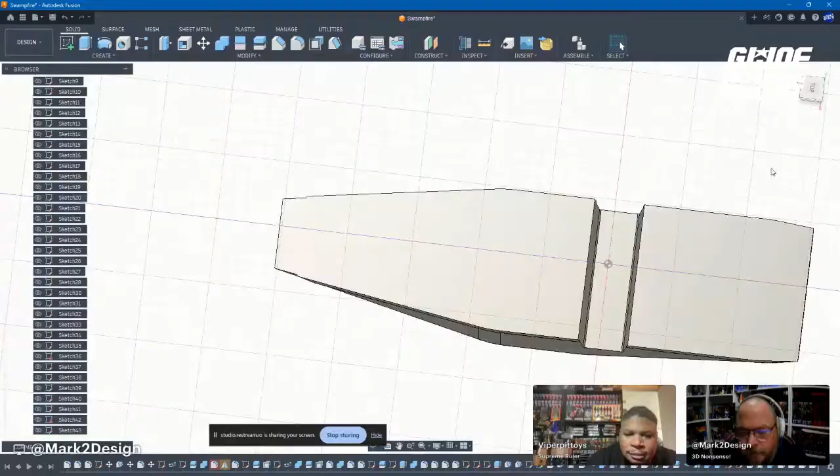Okay so I know where I'm at. I gotta split the back for the tail fin thing. Okay so now you put a little bit of a curve in that slot there too, just down here, not a lot, just a little curve. Shouldn't affect anything, and I'll probably round this too, but I should get a little further along before I really screw with here, because there's a functionality that has to work, and I don't want to interfere with it and then have to go backwards and fix things like I just did. Okay.

It's actually a little curvy back here. So I made this the size I wanted it, and then I just wiggled it kind of more into place. I'll just hit E for extrude and let it cut. And that's gonna be fine.

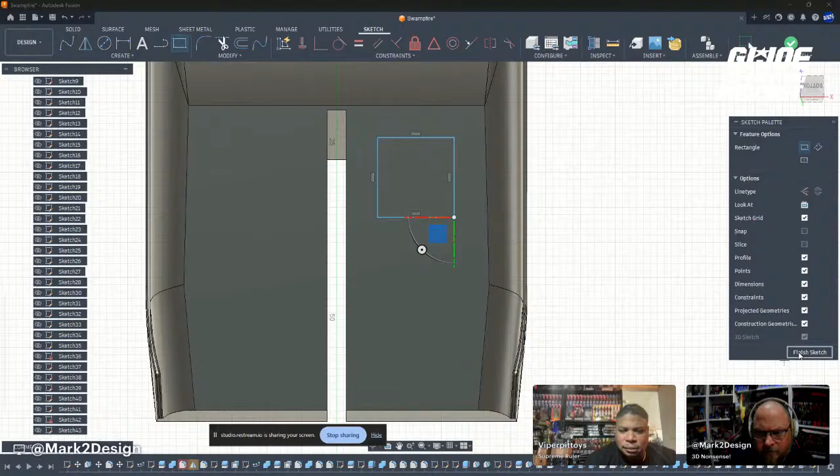So I selected the face that I'm putting it on, and I'm really kind of just going to eyeball this one. So one of them's sort of a square, the other one's like a long rectangle. So this is just a sketch on a face. I'm going to do a pipe, a square. A millimeter is too much, 0.75, see how it looks. Actually this is going to end up much bigger because we'll end up blowing it up.

Blowing it all up for classified. I'm going to go 0.5, so it'll still be a little less than a mil, and that's okay. So that means half of what I just kind of Boolean subtracted was above the face, so I'm going to add a little bit of depth to it. Let's go 0.2, and that was the wrong way. I got to do minus 0.2, and that looks like too much, so we'll come back and do minus 0.1. Yeah.

So we're gonna, like I always do, I'll round everything out. So there's always an interesting thing that happens. Come on. I'm just gonna do this the wrong way, then I'll do it the right way. So if I grab that angle and this angle and I round them together, they won't match up right. It looks like trash. So I've got to do them separate.

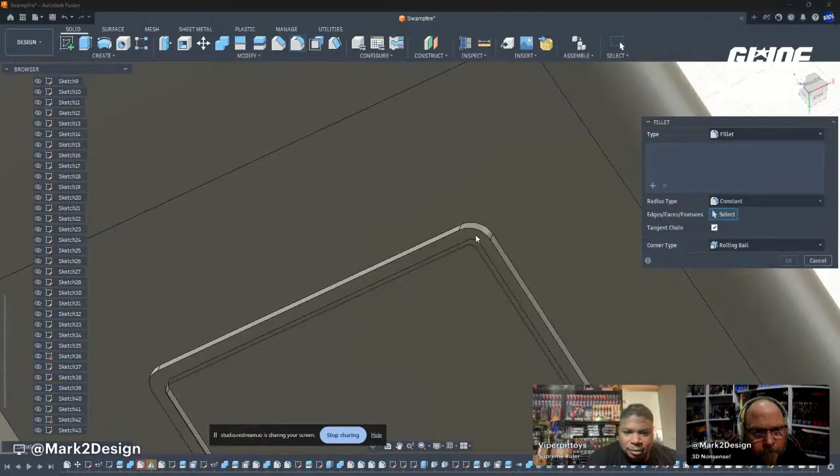The good news is, I can still do them, I don't have to do them one by one. I can select them all together, and then bring them to round this. It's those little things like you don't really realize that they'll have those differences unless you're doing this quite often, and you go, okay, that doesn't work right. There you go.

Yeah, it looks good, I eyeballed it, but it's certainly better than it would have been. Hopefully this will remember my measurement. Oh cool, it did, sweet. Then I just got to remember I want to do a minus point, go down point, make that a little pinch deeper, and then we'll do your round, play our little game with the corners.

We are 2.5 weeks from Joe Fest. Oh man, yeah, isn't that cool? I'm so excited.

I'm thinking about the amount of money I'll probably spend and how little it's going to look this year, when you put it all on the bed, for your Artwann's Hall picture. I'm not even worried about spending shit, I'm just looking forward to seeing everybody.

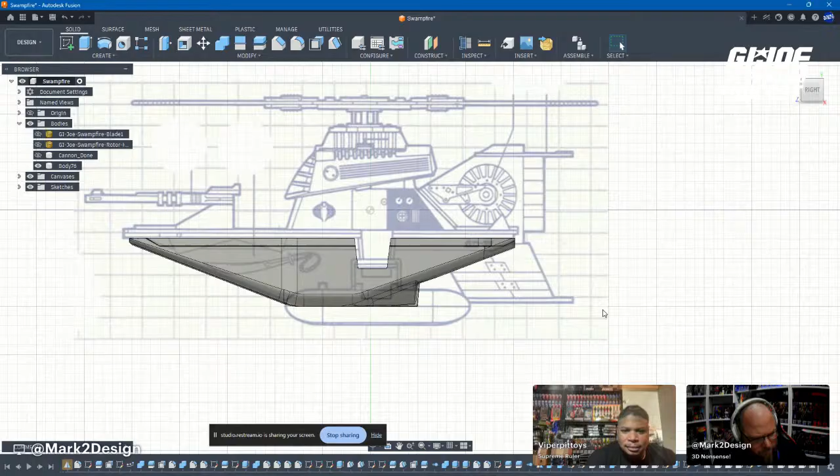There's a little nodule right here, I'll have to come back and do it later. There's a little divot in here where there's a little nodule on the tail fin that will help it kind of snap into place. We'll deal with that when we get there.

In the meantime, I think we're good. So, time to make some angles. And it's really not bad, this thing.

Right here is kind of like that first decision point. But it looks like we kind of have a bit of a cheat right there, we can see where it goes.

This is one of my favorites. I'm coming down here, and as long as I've touched this point, I'll get a nice line and a bit of a snap when I'm horizontal to it. So that was nice and easy.

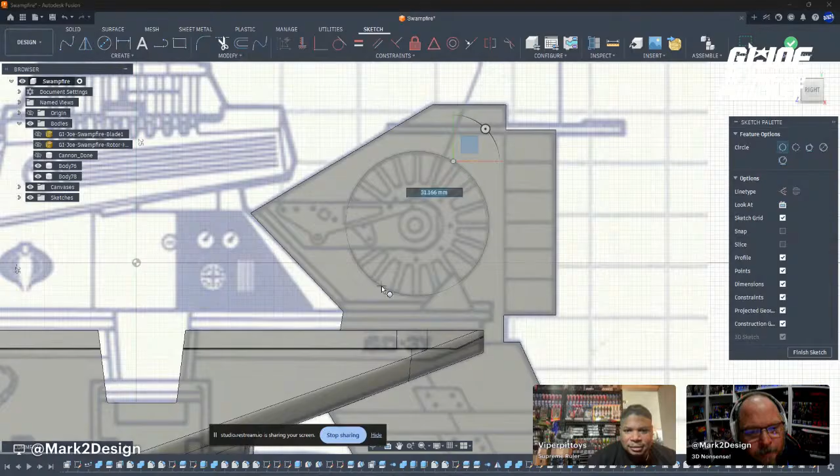So if you've got a scanner, if you've got the ability to do that, you're going to get something closer to the actual toy. Like if I was deliberately doing reproduction parts, a scan is a better way to do it than trying to do it from the blueprints. It just would not work out.

What's great is most of this is panel lines, and most of it's nice and flat. So this is just really not bad. Let's see if we can do the - there we go.

That's interesting, so there's this little split right here. That's not a thing, it's actually like a relief piece. But let's see if we can get these shapes, and you know, this is one of those situations where we only got to do half.

Snap there. So I don't have a point for it to snap to that's on center line. It's trying to snap to - actually, it should be looking right there. It's not liking it. No.

Okay, so if I come down to origin, that should do it. Yeah. And it's because I didn't start this on center, that's where the issue lied. But I was thinking about this curve too much.

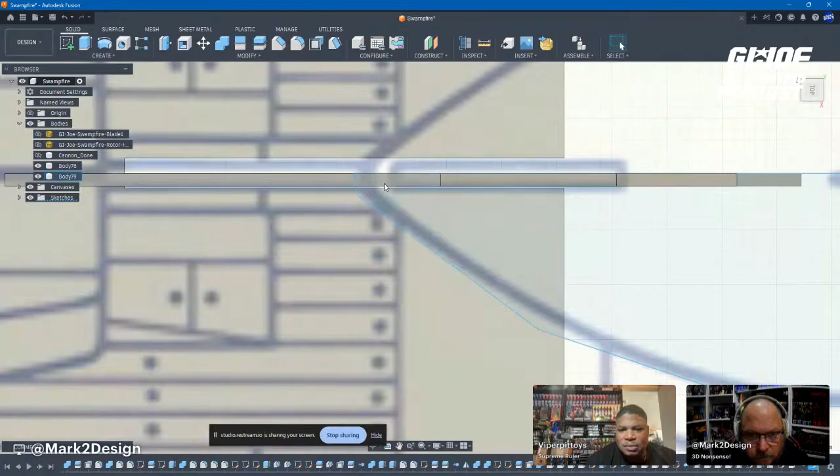I don't want the point, so I'm gonna try and move just this line up a little to stretch it out, but it may not like it. No, it's not that. But this definitely should be about there, so we'll see if that hosed it up too much.

Okay, so just need to make some adjustments. All right, we'll see how that goes. .9, 1.9. It's not too bad. Why is it going so far? It's snapping, okay.

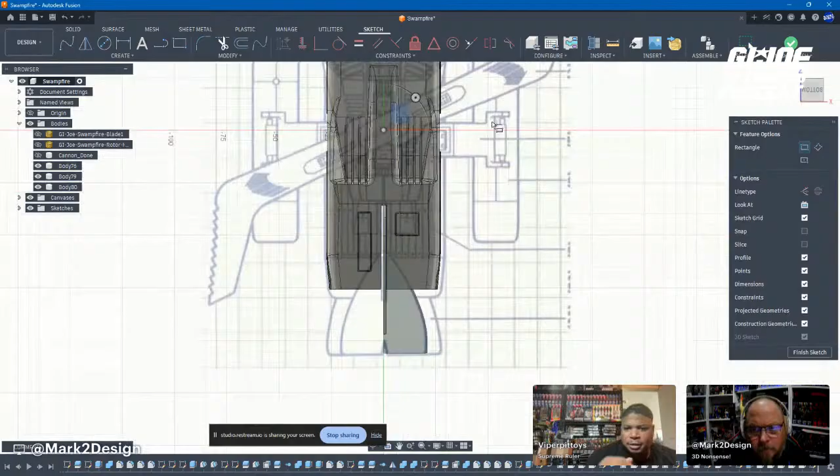Oh, so Ben was asking when the plane went red, like you were doing the extrude up type of thing, but it was red. Why was it red? Red means it's an error, it won't work. If you're asking me specifically what is the mathematical problem, what is the software issue that it can't do it, I don't have a technical answer to give for that. I don't know. Well, it was like you're extruding the fin upwards, and for some reason it was all red, but it still worked.

It did and it didn't. So when I had done the sketch, I selected that face, hit E for extrude, and as soon as I start to pull it up, because I'm pulling it through another body... because I'm extruding it through a body, the default is for it to subtract. So I had to go over and push new body. That's what I would have done because I didn't merge it, right? It's a new body. Yeah, the default when you extrude a new body through an existing body is for it to subtract. Sorry, I misunderstood.

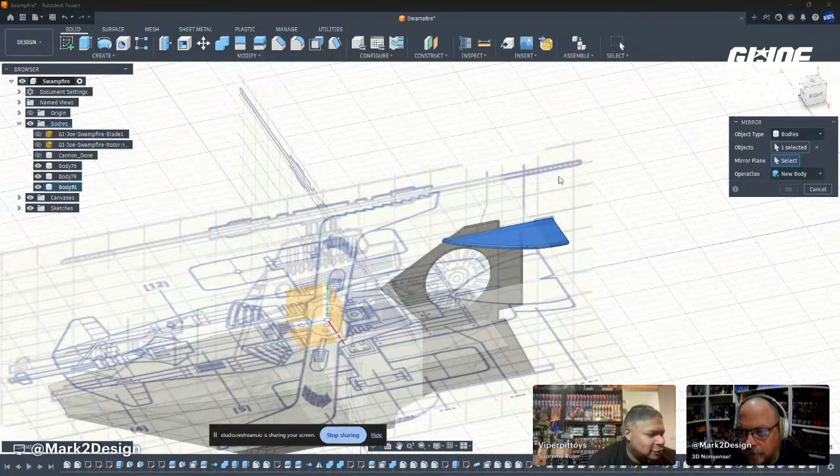Hi, Ben, by the way. I assume Ben's going to make it to Joe Fest. Correct me, let us know if I'm wrong about that, because that would be one of those things where I expect to see you. So it'd be weird if you're not there.

Shit, do that now. Okay, there's... once these are merged, this line right here is going to get a fillet. It gets pulled back pretty far, but I want to get a lot of these panel lines that are symmetric from left to right on here before I mirror this over. And it's not perfectly symmetric, like this arm that's holding the rotor is only on this side that we're looking at. And then on the other side, there's like a subtracted piece on the back side of right here. That's about it though, the rest of it's pretty symmetrical.

Pretty symmetric, yeah. All right, Ben says yeah, he'll be there. So yeah, I'm going to be there.

All right, so I'm going to draw a line so I can extrude out this piece, and it's sort of what rests up against the upper body of the Swampfire. Because I want lines to be parallel, I'm selecting that as the face for me to draw on, and that'll allow me to kind of touch that line. I don't know if you can see it, there's two little parallel lines. There's all this stuff in the way, but as I rotate in, you'll see these two little lines kind of snap on. Boom, there they are. So that means I'm parallel to that boom line that's there.

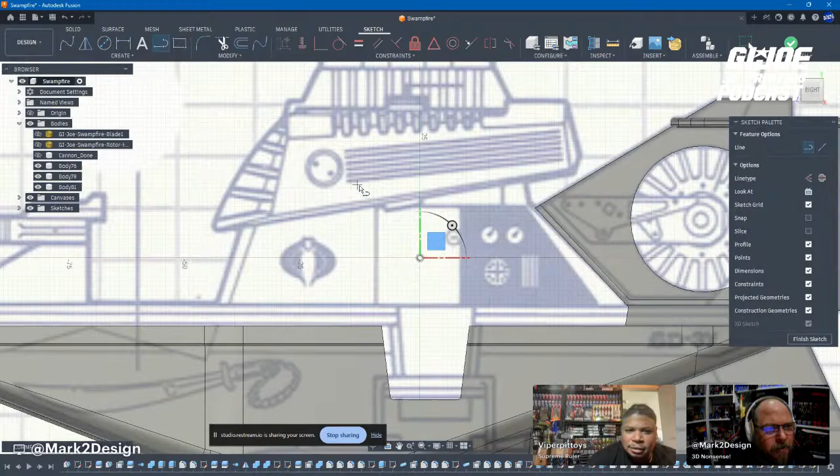Just trying to think about it as I go through, like what's the quickest, easiest way to do this. You thinking of patterning it, or just doing it manually? Yeah, I think I'll create these pipes.

Instead of doing cut here, I'll do new body. Oh, did I... okay, I didn't draw it on the face. I should have drawn it on the face. Get rid of that. That explains why I didn't want to snap that thing earlier.

Great, pipe. Yep, nope, just a hair larger body. Okay, so because I'm going to be doing a pattern on a path with this, I'm going to go in and kind of pre-curve these edges.

Basically, you want to get it right before you make the copies. Yeah, otherwise it's just saving me clicks.

Yeah, it's about your workflow. Once you know what you're doing, the next step is working towards efficiency. Yep, getting efficient.

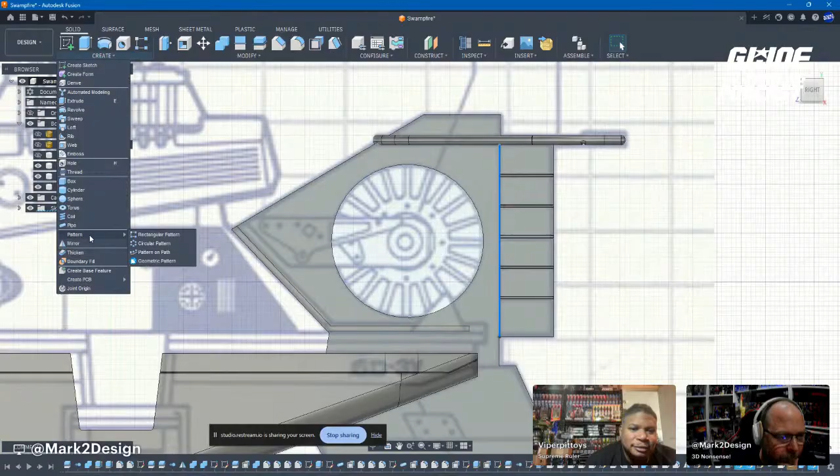I don't know if you saw that - I had it nice and 90 degree, and it wanted to snap over to this edge. Because I'm on this face, it'll snap to these corners, and I need it here. There we go, so I wiggled the mouse a hair, and it snapped over to the corner. It was probably because I was putting force on the mouse to push the button, made it wiggle that hair over, like a punk.

All right, so the mistake I just made there - pipe again, I'm gonna do the new body. So just like I made all these little curves earlier, if I subtract this with that right angle there, it's not just like clicking one side and the other side and then rounding it.

I have to click that line, click that line, click that line, click that line. So the efficient way to do it is to do it now.

Yeah, these are things you learn after you get properly annoyed. Yeah, exactly. I'm still gonna have to do some clicking and stuff, but I would have had to go through and get every single line.

Yep, and then do it again for all these corners. So I ended up doing it more, but sometimes because I'm doing this as a demonstration and talking about how to get through mistakes and troubleshoot, I did it more than I needed to, just to illustrate.

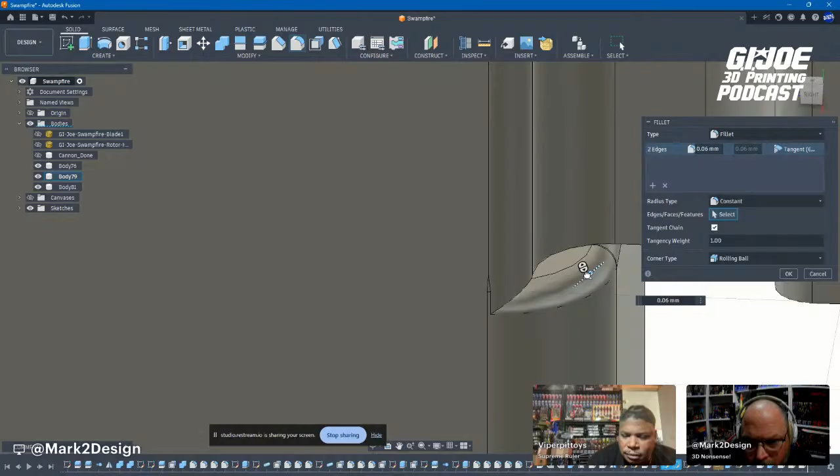So here's the actual problem: it rolls over. Yeah, that's not gonna work, there's no way. Anyway, it's also teeny tiny, so I really don't need to spend too much time on it. I call those the weld lines, basically welds.

So again, all these other panel lines aren't on the toy, so I'm not gonna worry about them. There is one kind of over here, I'll come back and do. I'm gonna get this bottom piece first, and you can see it's kind of hidden there.

So what I know is this corner is where it ends. So I'm gonna grab that corner. I'm gonna cut that whole front part off temporarily, so I know where the tip is, since I can't see it on the blueprint.

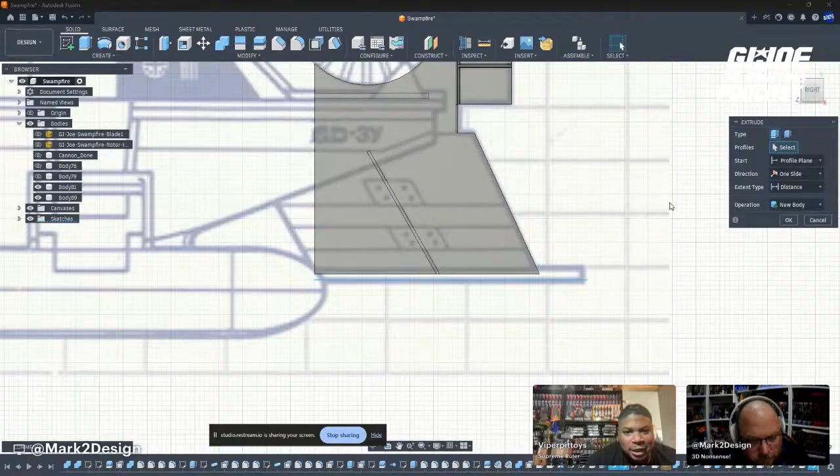I gotta tell you, I'm having a lot more fun on this one than I did on the Fang 2. Well yeah, it's moving along quickly, we don't have to redo everything. Yeah, it was an unexpected challenge, you know.

The other thing, and a big part of it, was - I've been complaining about the blueprints not being totally accurate, but these are so much better than the blueprints for the Fang 2, those late era blueprints. For me, it's just all the difference in the world. It's the difference between genuinely enjoying what I'm doing right now and being goddamn frustrated.

The late era blueprints probably got kind of lazy. Yeah, I'm sure they were like, the juice isn't worth the squeeze or whatever - they just didn't want to spend the money on that art. Uh, yeah.

Interesting thing, I saw - remember I was like, man, I can't figure out what I did with my Fang 2? Then I go in the other room, and it's on the wall. I was curious if you were going to say it was hanging from the ceiling. Yeah, it's on the wall. I was like, dude, I didn't remember putting it there, but I must have. Now the other interesting thing is I know I have more than one of them, because I typically have more than one. My other one is boxed. I was like, okay. First world problems. Yeah.

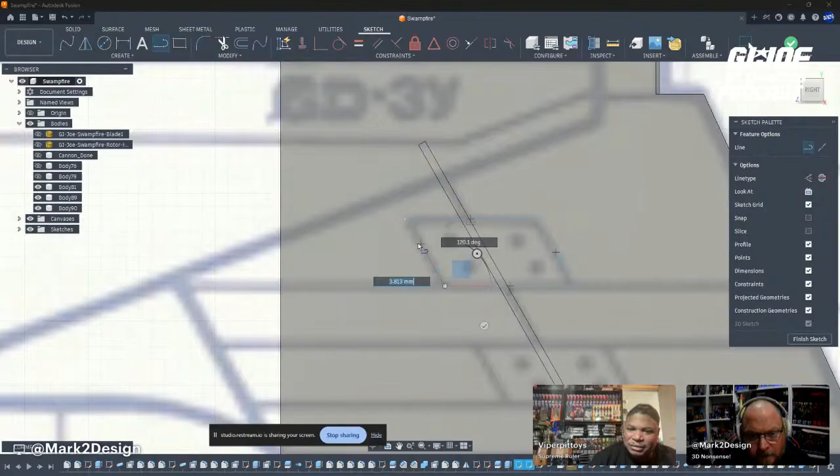So this is a bit of a thing here. I can get parallel, I can have all kinds, but I can't make it snap to that point. So that doesn't always work. Let me see what happens. Cool, that little thing I just did can be a little tricky sometimes. It can be finicky.

So it makes sense that this line should be through the middle of this trapezoid. It's not on this drawing, and it's not on the toy either, but it's kind of reversed on the toy - like one side is heavier than that side on the toy. I'm just going to try and move it to the middle once I've got it extruded out. Okay.

Okay, so it's going negative right now because that's the red. Oh yeah, but then I quickly went over and changed it to new body. Okay, so it's possible you missed that. I did it that quick. Probably, yeah.

Other thing is, when it's at an angle like that, you kind of have to eyeball the middle. No, it'll snap - see how it snaps. Even though it's a trapezoid, it knows where the middle of that line is. The question is, will it? Okay, yeah, actually that's not bad. I wasn't sure if it would end up hitting the same angle as this line, which it needs to. So I don't mind that. I'll just move this whole thing again in a second.

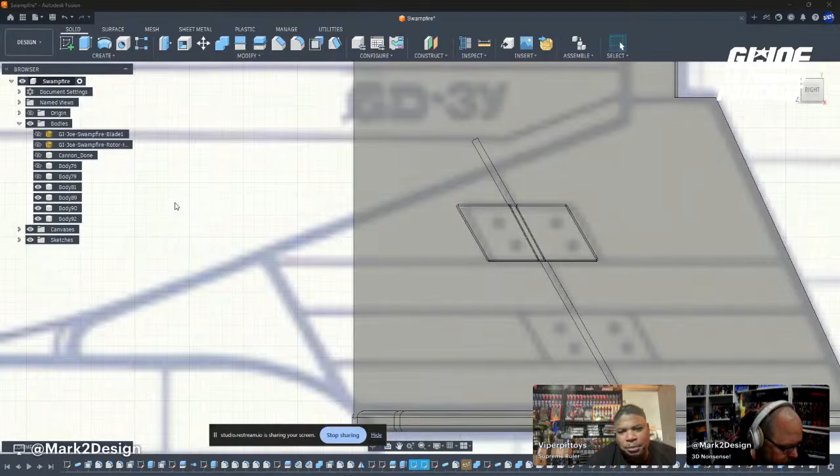So this will be interesting. I've got to put these in - we'll call them the bolts. Yep, the bolts. But I don't know that there's going to be a good way to, without mostly eyeballing it, put them down.

Again, new body - I like that. I don't mention everything I do when I create a new shape, it's always a new body. Okay. So let's see if there's a way we can do this. We might be able to pattern on path it. Let's see.

If I select that, I do that as the path direction. No, that's not great. Identical, also not great. Yeah, I think I'm just going to have to do it manually.

There's also - I do two, okay, and keep them on the same line. Yep, and then they'll be equal distance left to right. Right, and then you copy. Yep, and then just move it on the same line. Yeah, that's not bad. I'll move these up a little bit.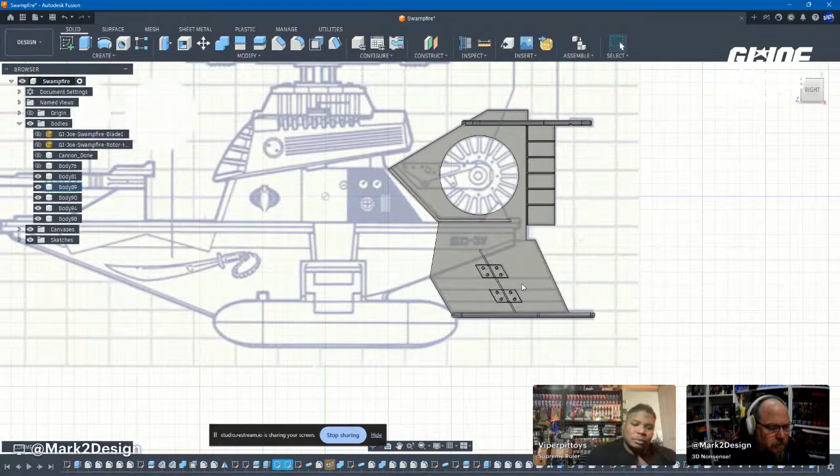Again, those other panel lines don't exist on the toy. Okay. Let me put that back together. I'll see if this panel line I'm talking about even shows up. Okay, it kind of follows this line, just out a little further. It's just weird because it kind of just dead ends, which panel lines don't typically do.

I'm just going to round some corners and edges. Now, when you're rounding edges, do you do things mathematically, or are you always kind of eyeballing it? It's kind of a mixture, it depends on the thing. These I'm eyeballing, for sure.

Yeah, I've definitely had projects that demanded a little more precision, and so I'll have little yellow stickies, and I'll write down like all the panel lines will be this thickness, they will be this deep, they will have a fillet of exactly point whatever. So yeah, it depends on the specific project.

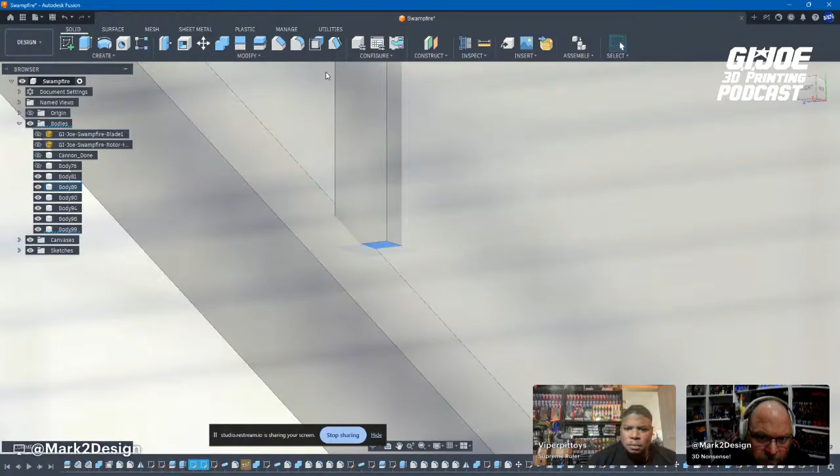So this is us - yeah, I'm going to do new body. I'm going to bring this face down, and I'm going to split this guy using that. Get rid of this little chunk. So that just cleans that up a little.

It's a wonder why I don't really do vehicles. I love working with shapes as opposed to organic stuff, but I've gotten so dialed into what I'm trying to do organically that I just leave the vehicles to the vehicle guys.

I was talking to somebody about this the other day. It's kind of like people that do crossword puzzles. You don't start out good at it. Over time you get a little better, then you get really good, and that becomes kind of your thing. It's the same here - you've been focusing on something, getting better at it, and you enjoy the challenge and where you're at.

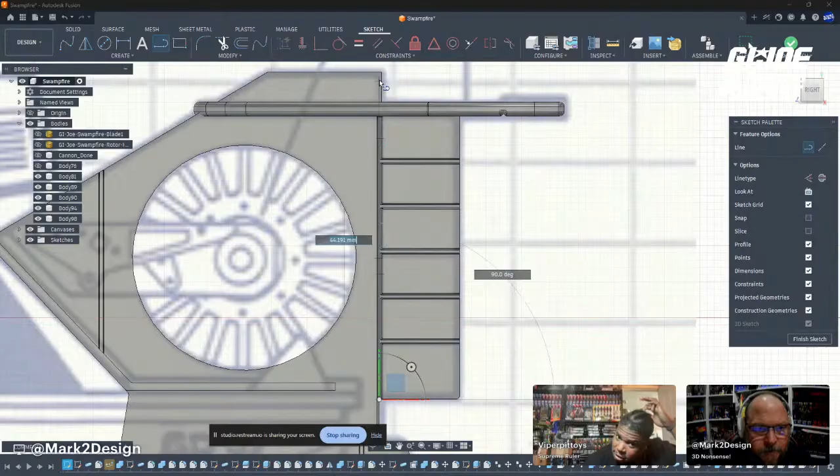So I'm looking at that - I'm assuming you're trying to get some roundness right there and it's not working. Yeah, it's hitting that spot we were fooling with earlier. I want to just chop it off and redo it, because there's no reason this shouldn't easily work. Now it's not going to do a lot because these curves only allow so much. I don't need it to be super round, I just need to match the roundness of those other bits.

Some of this I could have done before I did the mirror, it just didn't occur to me. I'm just doing a little cleanup before I knock out the rest of that detail.

I've often noticed that sometimes you'll do these types of details before mirroring, and then you go 'oh I shouldn't have done that' or 'I did too much,' and you've got to go back. So how do you just realize it once you run into a roadblock? It's kind of the risk of making a shape that's never existed before. Sometimes I've done a similar enough thing enough times that I remember where certain hiccups are going to pop up, and sometimes I just don't know.

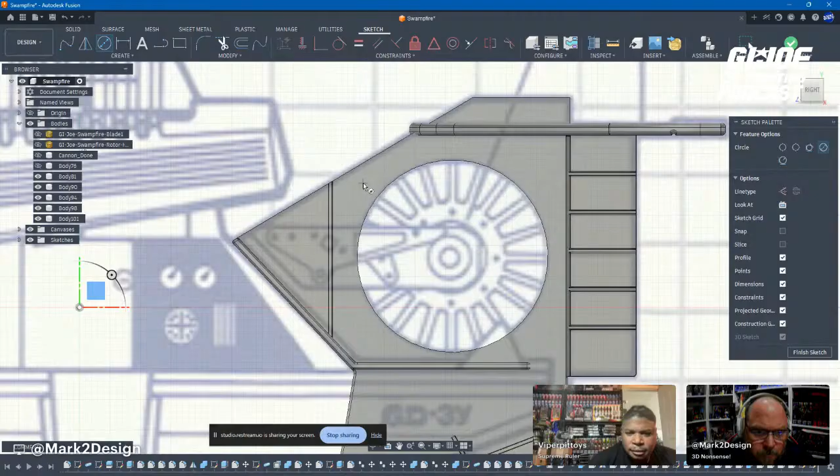One, two - oh, they're not really symmetrical, the bolts. No, they are and they aren't. The ones that are there are symmetric, but there's some that are missing. The top one will be missing, this one will actually fall under here, there's one over here but hidden underneath, and then it's missing over here. Pretty little subtle things.

So I did a split body - oh god, fuck you, Sketch. The sketch was popping up and preventing me from selecting the face I wanted, so I did a split body so I can grab it. Since this is just so I don't have to mirror it.

So we'll just do a pattern, circle pattern. And this is where it'll get tricky - 1, 2, 3, 4, 5, 6, 7, 8, 9, 10, 11, 12. There should be 12-ish, and then you'll go back and get rid of the ones that aren't there.

And before even that... okay, that's that. All right, so that's weird. Okay, with those selected, I'm going to right click and do move copy - I'm not doing a copy, but I'm selecting this pattern, the rotate tool over here, and for the axis I'm selecting this. So there should be one at 12 o'clock, one at 6 o'clock. Gotcha, yep, and so about out there.

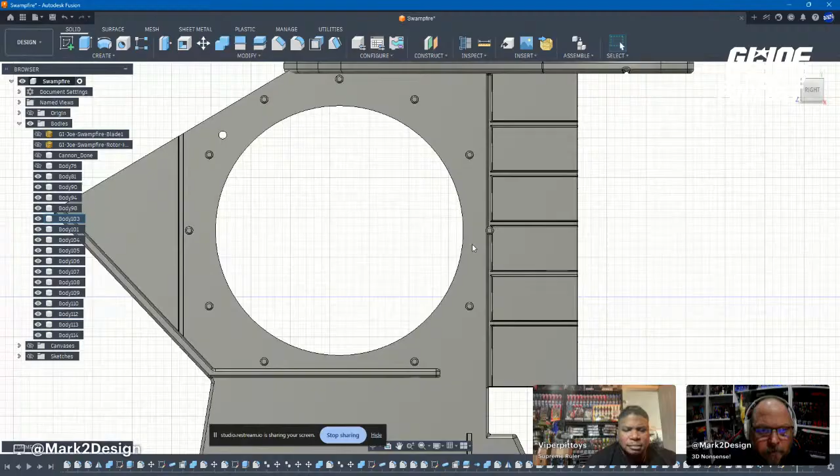I'm gonna redo that, undo that. I'll deal with this whole thing after I get rid of these I don't want — so we don't want that one, or that one, or that one, and we don't want this one. Okay, so the 12, the 3, the 6, and the 9.

Okay, let me do that. So all I did was grab the negative cylinder that was there and did offset face until it was closed. It didn't error out, so hip hip hooray!

Don't worry about it, there's this one sketch — well, because I turned them on. Just some sketches that are on that are kind of interfering with what I'm doing, so I'm gonna get rid of those. There we go.

I'm looking to see where the interior face of this arm is, whether it was at center or flush with the side, and it looks like it's flush with the side. So I grab that face and do my drawing from there.

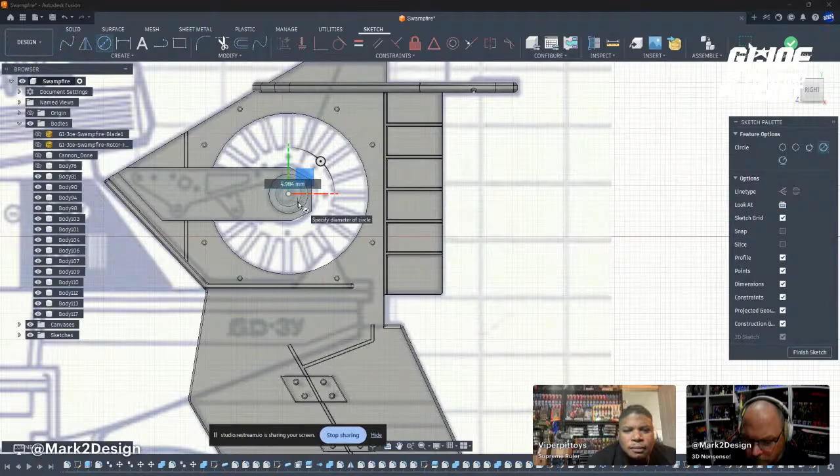So this is a little thin — just knowing that this is going to be a 3D print, I can make those adjustments later after we scale it up. I'll see what the size turns out to actually be, and based on that, make an adjustment. I don't want it to be something that breaks too easily or something like that.

I keep turning the sketches on and off because they're a bit much, but I turned off the top and the front — it's a little easier to look at.

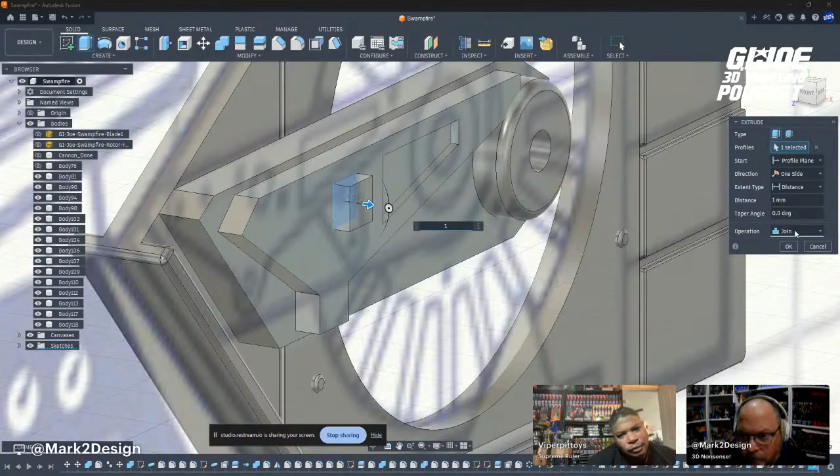So I'm going to do a new body. And if I draw it in the middle of it, like on that face, I can find the center of everything — snap to the center. Do this hole, push it back a little bit. And then I can just rotate this thing, using that axis — should just go to 45. And that's that.

So I should be able to snap to the middle of this curve too. There we go, nice — oh man, I like it when shit works, dude. Push back. Yep. Okay, so that one doesn't come flush. Okay.

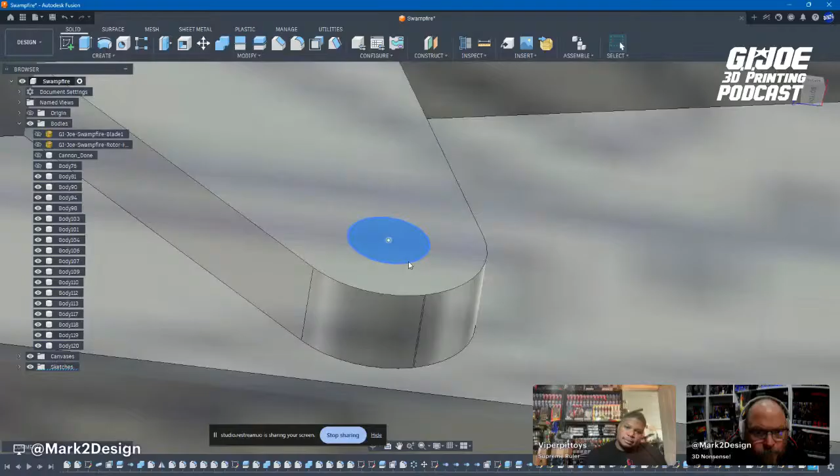Also nice. Like, because this is going to be a print, not a production piece, there's a bunch of steps that I'm skipping, and it feels great.

Like anytime there's a cut or a protrusion, technically, if this mold is coming in from this side, this is all like a cut in here, so everything would have to be beveled. Just so many steps, just so you can pull it off. Yeah, it's all mold release.

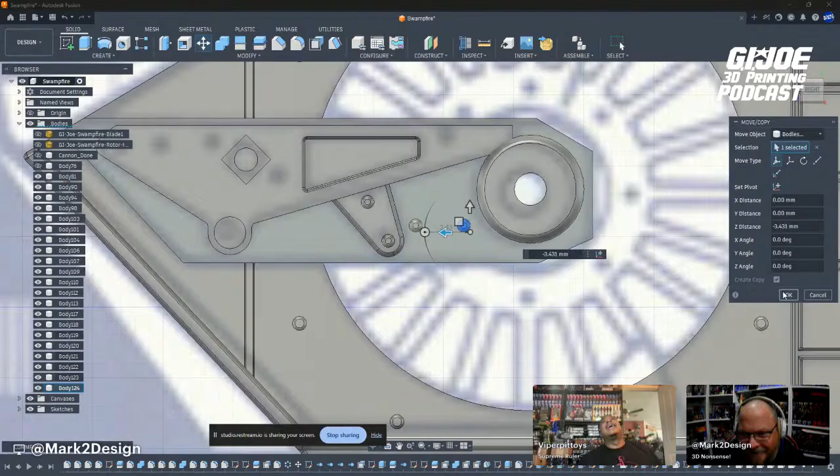Man, I definitely drank I guess 3/4 of a pot of coffee this morning. Oh man, and I'm ready. Yep, you're holding on to liquid nitro. Yeah, it's good, it'll come out of me smelling like coffee. I miss coffee, I only really get to drink coffee when I'm on vacation. So does the caffeine do something to you? Have we talked about this? I know you're a coffee guy, and I know you don't really drink it. Yeah, because I have no access to coffee at home, and in order for me to get coffee I'd have to drive up. But it's deliberate, so I don't overindulge and get super addicted. So, me basically. That's what I'm hearing.

Interesting, right? These details that I still have inside here are all negative, they're all cuts in. Okay, yeah, that's what I was wondering there.

But oh yeah, I like coffee, that's for sure. It's just if I had it at home I'd be bugging out, I'd have to have it 3 times a day every day and it'd become an expense. Sounds perfect. But so I ran out of K cups yesterday, and I knew I was running out, and I made the conscious decision I wasn't going to go get any because I didn't feel like leaving the house again. I'd done a bunch of running around yesterday, so I busted out the grinder and the beans, brewed an actual pot of coffee today, which I don't usually do.

So you can see that little shaded area that looks like a detail that doesn't exist on the toy. It's actually up here. Interesting. Let's see. And it's larger as well, it's like the one larger cut of these pieces.

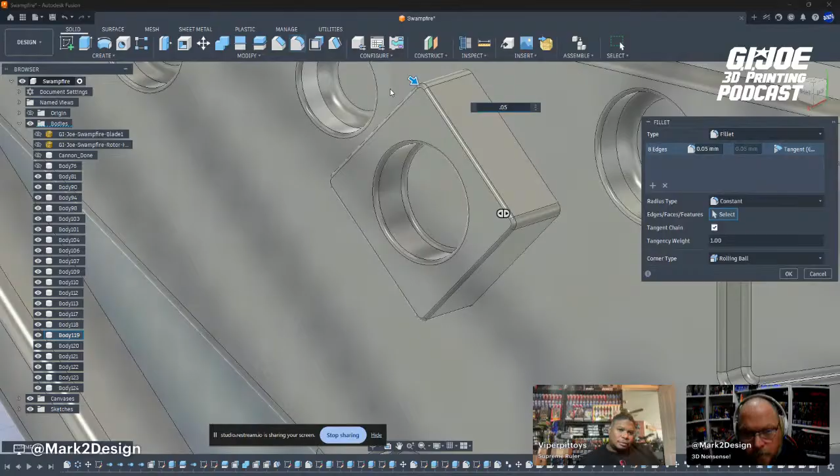All right, so at that, I'm gonna group all this, and I'm gonna call it for today. So I have a movie to see. Oh yeah, oh yeah. I did mirror that, right? Yeah.

Cool. So what we've got is, I guess, all the black pieces, all the black parts. It wasn't the plan, but that's how it worked out. With the gun, where's the gun at? Oh, we do, we have the gun. Good call. And so we're basically the top portion, or the deck portion, and then the prop or props, because you got to do the one back there too.

Cool, yeah, so we still got, like you said, the props up top. Shane's provided those for us, and they're pretty damn close, so that'll go quick, that'll go real quick. And that leaves us with the pontoons, the arms that hold said pontoons. There's a bit of, you hear the ratchet, right? Yeah, so that'll be interesting to see how we do that. And then the top. So like, what we have left is more than half, we are not halfway there. But we'll see what we're able to pull off with magic next time.